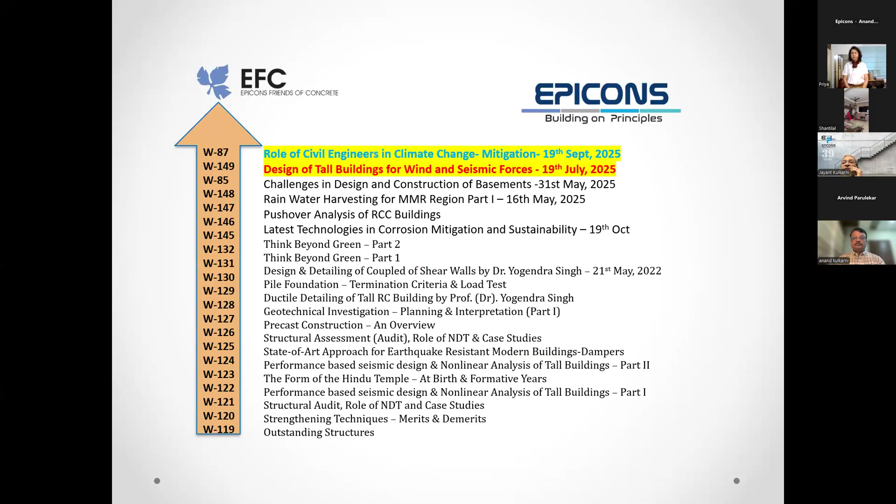With this, I introduce my team. From left side is Arvind Parolekar, architect Parashar Moge, engineer P.P. Pandey, myself, engineer Ravindra Deshpande, engineer Anil Joshi, and engineer Anand Kulkarni. These are all directors of Epicons, unit heads of Epicons, taking Epicons further. And for every workshop, webinar, all of them are involved.

With this, I thank you very much. This is a photograph of our entire team. The photograph is an old one, but most of the team members are still with us today. So I hand over to Priya.

Thank you, sir. That again was an extremely short presentation by the Epicons team and EFC. And of course, there's a lot that is very interesting on the Epicons website. I really request all of you to once again go to their website and see. I find it extremely interesting and fascinating.

So, friends, moving on, I now have the huge responsibility of telling you a little about myself. I run a company called Wide Angle Forum, a small company based in Pune. We do events, and we have a design publication called Design Vista. We conduct study tours for anybody working in design, lifestyle, and construction. We love connecting people together, and that's why our tagline is Connecting Creative Minds, because I believe everybody who is born a human being is a creative person, and I would love to connect with all of you.

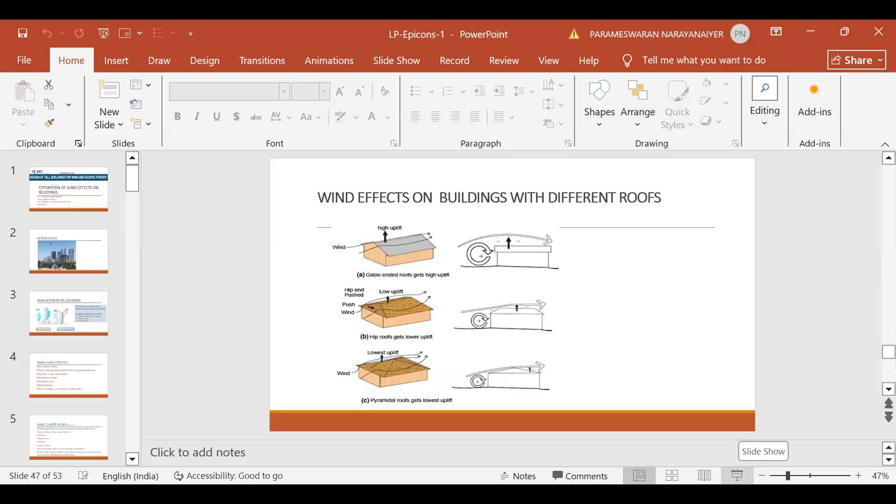Good morning everybody. Thank you, Priya, for the introduction, and thank you, Mr. Jayant Kulkarni, for giving me this opportunity to share my experience with the audience. I welcome you all to webinar 149 on design of tall buildings for seismic and wind forces. The first lecture is on estimation of wind effects on buildings.

As already discussed, tall buildings are mushrooming and they are essentially designed for dead load, live load, and the main lateral forces like wind and seismic forces. These are not isolated structures but very closely spaced structures, so if some collapse happens for one structure, the other structures are also affected, and the presence of nearby structures also affects the behavior of the other structures. So the main lateral forces for which these structures are designed are wind and seismic forces.

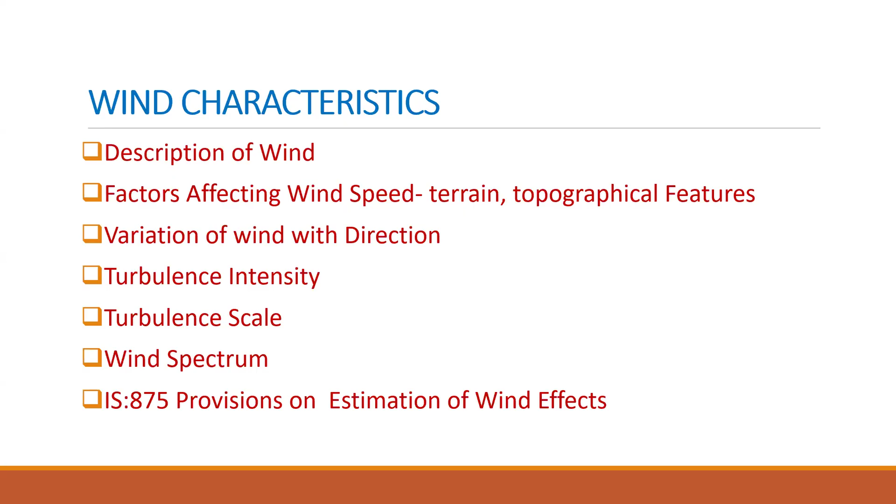When we talk about the wind climate in India, you can see that it is different from other continents. Wind is nothing but flow of air, generated because of atmospheric pressure differentials. But the earth is not stationary, it is also rotating. Because of the rotation of the earth, in the northern hemisphere the wind gets deflected to the right side, and in the southern hemisphere it gets deflected to the left side. So there are many complexities involved in the wind flow, and we feel extreme winds like tropical cyclones and extratropical cyclones.

Then we have the monsoon wind in our country. Thunderstorms are experienced in many parts of our country, large in number, but for short duration. Then tornadoes are there, and pressure system winds in a very small part of the country. So most parts of India experience wind that is a mix of these five mechanisms. We have to understand that the wind experienced in Western Europe or Canada is different from what we have in our country, because they have a more fully developed pressure system, but we have extreme events happening too. So our wind climate is different from other countries. That is one thing we need to understand first.

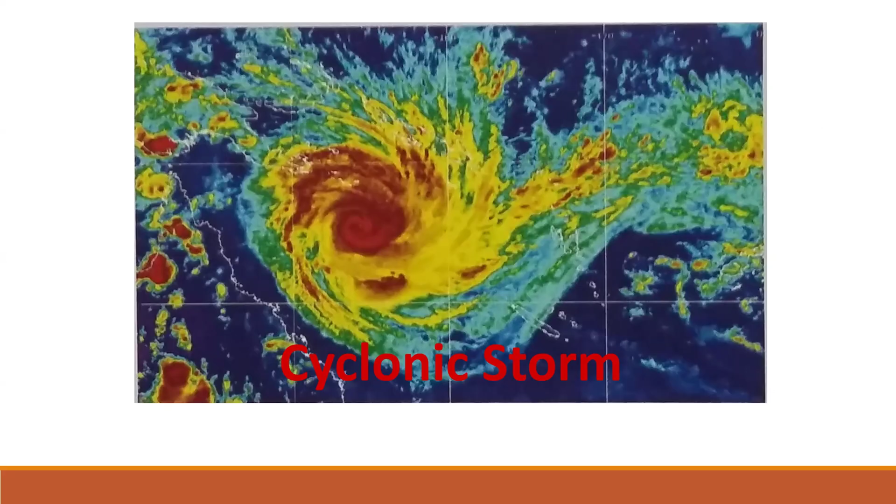Now coming to the cyclonic storm, India has a vast coastal line, and the eastern coast has more cyclonic storms than the western coast. But nowadays, because of climate change, the cyclonic storms experienced by the western coast are also increasing.

Now let us first understand how these tropical storms are formed. Basically, high humidity and ocean temperature over 26 degrees are the two major contributing factors. Water evaporates from the ocean surface and comes into contact with a mass of cold air, forming clouds. You can see the formation of clouds first in the left-hand side photo. Then a column of low pressure develops at the center, which we generally term as the eye of the cyclone, and wind forms around that particular eye. Then as the pressure in the central column weakens, the speed of the wind around it increases. That is how the cyclone is formed.

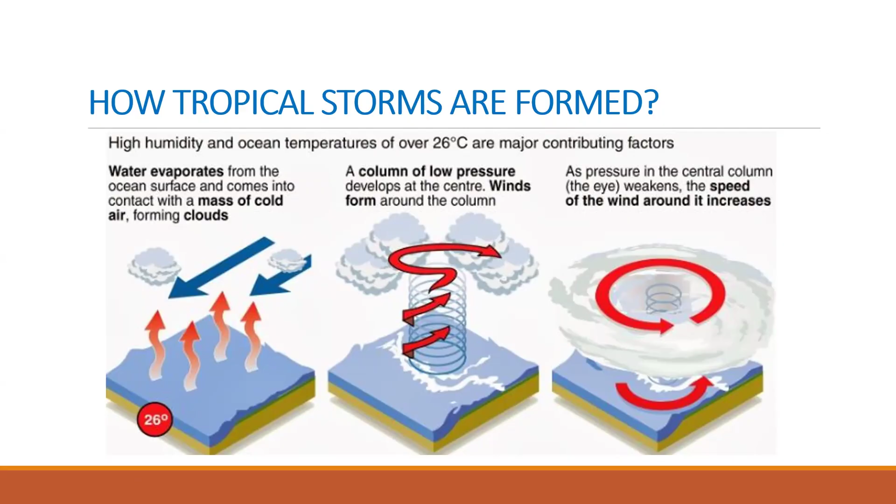So this is the eye, and surrounding that eye you have strong winds with circular contours. Wind moves counterclockwise in the northern hemisphere and clockwise in the southern hemisphere about the center of low pressure. We know that generally, whether it is wind or water, it flows from high pressure to low pressure. So you have a low pressure here, which we call the eye of the cyclone, and then circular contours with high wind there.

Coastal regions are battered frequently by severe cyclones, and we have about 5,770 kilometers of coastline out of a total of 7,516 kilometers that is prone to cyclones.

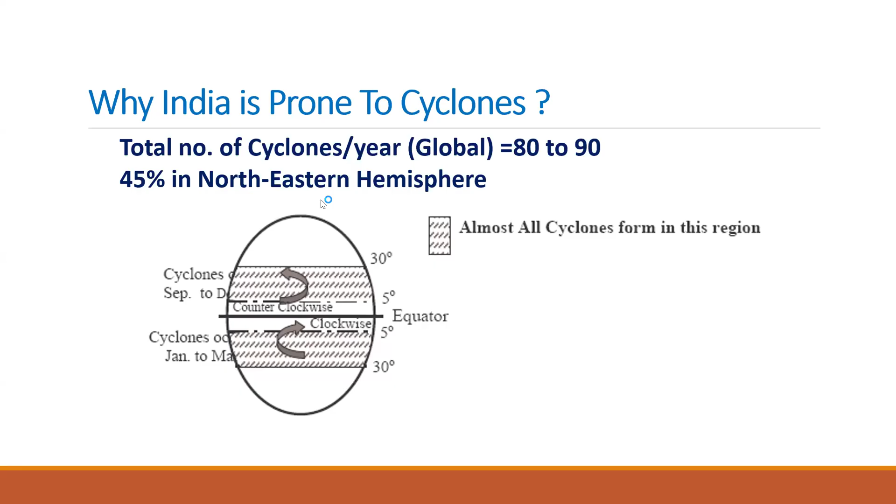Why is India prone to cyclones? Because of its location. You can see that the region between 5 degrees to 30 degrees above the equator, in the northern hemisphere, and 5 degrees to 30 degrees in the southern hemisphere, experiences more cyclones. So totally, there are something like 80 to 90 cyclones every year globally, and 45% of that is in the northeastern hemisphere where India is located. That is why we experience cyclones every year.

Now we have to understand that the cyclone is not an independent phenomenon, but it is accompanied by flood and also storm surge. Another important aspect is that there is formation of heavy cloud and rain happening along with that.

The cyclone also has a circumferential wind speed variation, because when we talk about wind we always talk about the variation of wind speed with respect to height. But in the case of cyclones, there is a circumferential wind speed variation, and that can be felt up to an area with a radius of 300 to 600 kilometers.

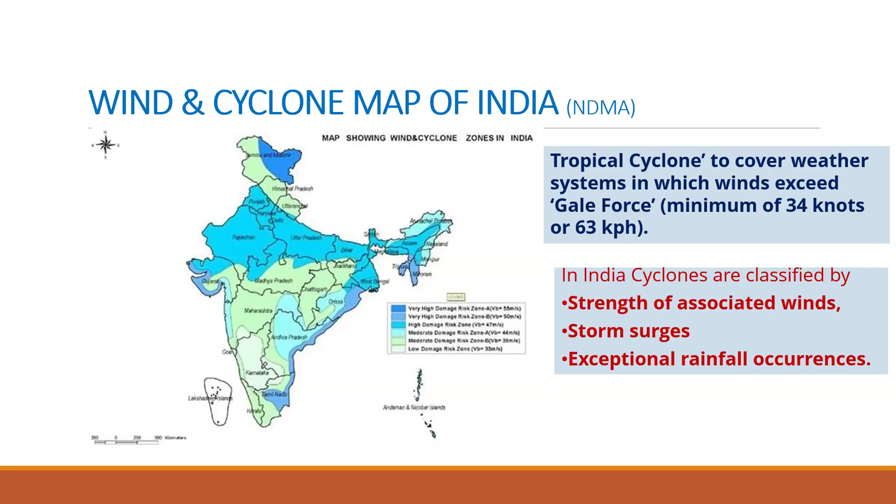You can see that the number of cyclones, like in the eastern coast, are on the higher side. When we call a wind a tropical cyclone, that is when the wind exceeds gale force, or at least 63 kilometer per hour speed, then we call it a cyclone. Cyclones are associated with high wind speed, storm surges, and exceptional rainfall occurrences, which can lead to floods also.

When we talk about the categories of cyclones, we generally hear the term depression - that is, a depression has developed either in the Indian Ocean or Arabian Sea. There, 31 to 49 kilometer per hour is moderate to rough condition of the sea, where the wave height is likely to be between 1.25 to 2.5 meter for moderate and 2.5 to 4 meter for rough sea.

Then deep depression, that is 50 to 61 kilometer per hour, where the wave height may be up to 4 to 6 meter. Then cyclonic storm, that is 62 to 87 kilometer per hour, where the wave height may be 6 to 9 meter, and the condition of the sea will be quite rough. And severe cyclonic storm, where the wave height is increasing to 9 to 14 meter.

Then very severe cyclonic storm and super cyclonic storm - these are basically phenomenal, not always happening, but maybe once in a while. But if the wind speed is exceeding, just think what type of devastation it is going to cause. And the wave height is also 14 meter.

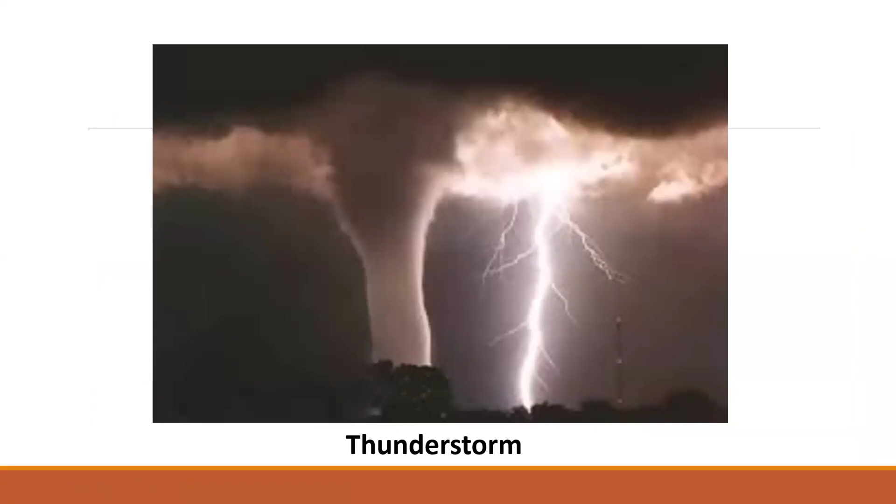Then we have more short thunderstorms experienced in many parts of our country - that is another type of strong wind. And tornado, that is a narrow band phenomena.

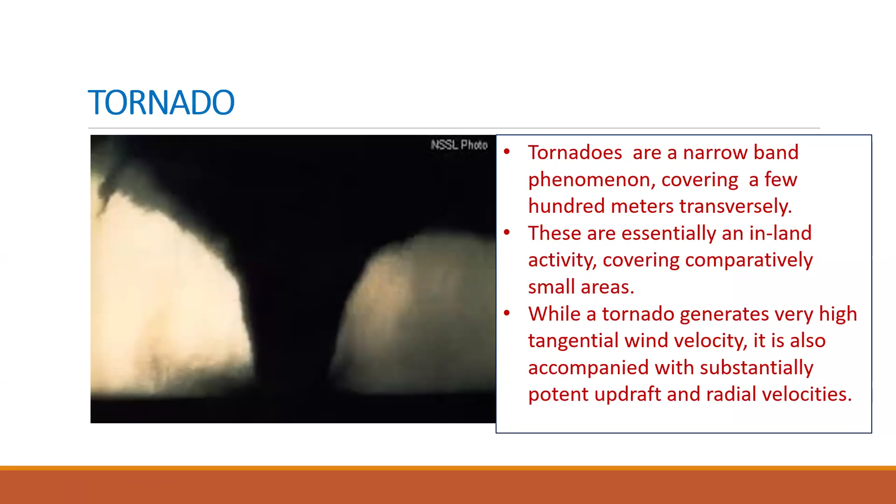In fact yesterday in the US, they had one tornado happening there. They are basically an inland activity covering a comparatively small area, but a tornado generates high tangential wind velocity, and it is also accompanied by substantially potent updraft and radial velocities. That means the variation of wind speed in this event is also different from normal wind.

So windstorm scales and effects are expressed with the help of the Beaufort scale. You can see there are 0 to 12, and 12 is the hurricane here, which has more than 32.7 meter per second or 64 knots wind speed. This wind speed is measured 10 meter above the surface.

Then we have the Saffir-Simpson hurricane scale, because the cyclone known as hurricane in the US is classified into weak to devastating hurricane, and there the wind speed is increasing to more than 250 kilometer per hour. And there is another Fujita tornado scale.

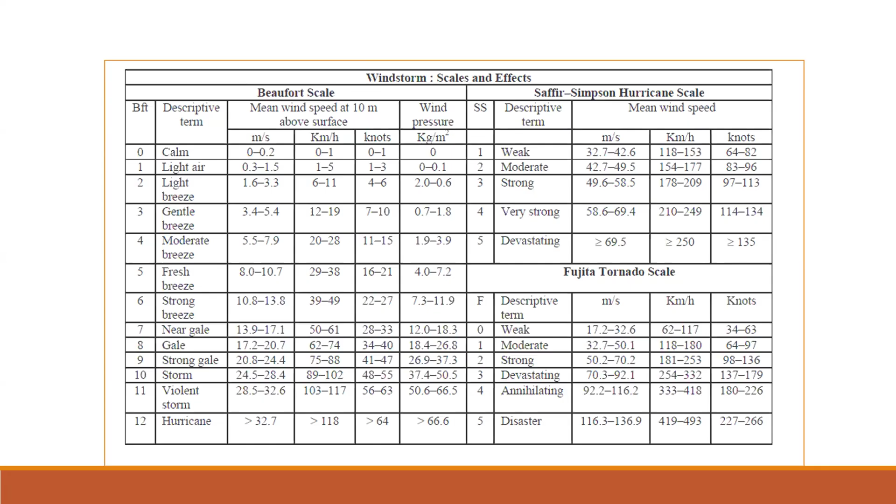Again, they depend upon the wind speed, classified from weak to disaster scale, and the wind speed is increasing to 136.9 meter per second. So this is basically how you can classify cyclonic storm or tornado based on the wind speed, and definitely that will be associated with what type of devastation it causes. For example, the damage expected with respect to buildings, as stated by NDMA, is explained below.

If it is a deep depression or a cyclonic storm, that is likely to cause a major problem to loose and unsecured structures or thatched huts which are there in our coastal areas - they are the first to get damaged. Then with severe cyclonic storm, again damage to the thatched huts. And it's not only that they affect huts or buildings, but along with that there may be uprooting of trees, damage to power and communication lines, or it may affect electric poles and other structures.

Then very severe cyclonic storm causes extensive damage to thatched roofs and huts, and can also damage some old buildings, with large scale disruption of power and communication lines. And super cyclone, like the one which we experienced in Orissa.

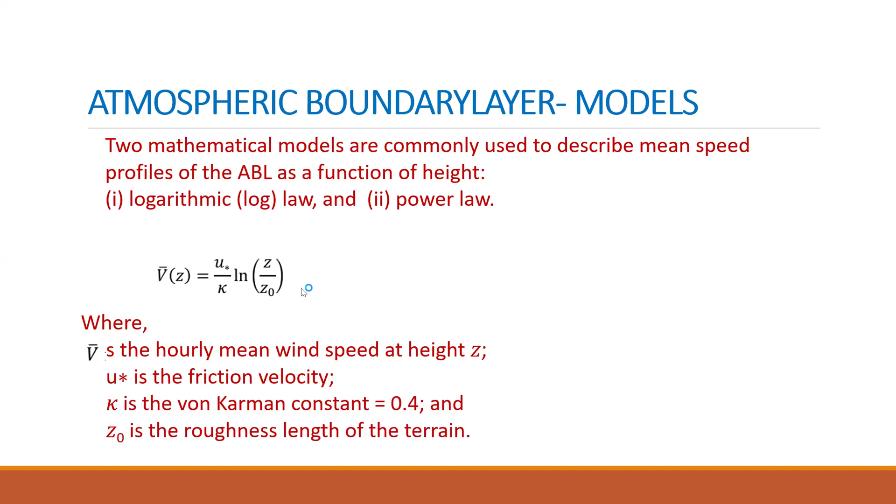If V bar Z is the hourly wind speed at height Z, then it is a function of friction velocity, the von Karman constant, which we generally take as 0.4, and the logarithm of Z, since it varies with height. So at any height Z, and Z0 is the surface roughness length of the terrain. Surface roughness length means the surface which is offering some resistance to the flow of wind. This is the logarithmic law used to describe the mean speed along the atmospheric boundary layer.

Another is the power law that may be used to describe the ABL. This is important because if you see any wind tunnel test report, the wind simulated in the wind tunnel is based on the power law. The reference wind speed is a function of the speed at the reference height, generally taken as 10 meters. So at any height Z, say 20 or 30 meters, we divide, for example 30 by 10, and there is an exponent, the power law exponent, corresponding to the surface or terrain roughness.

Now, we need to understand that when we talk about the hourly mean wind speed, there is no gust wind included. The log profile or the power law profile are basically the mean wind speed profile and not the gust speed profile. But if we want to get the gust speed profile, we need to include two terms: one is the peak factor for upwind velocity fluctuation, and the other is the turbulence intensity.

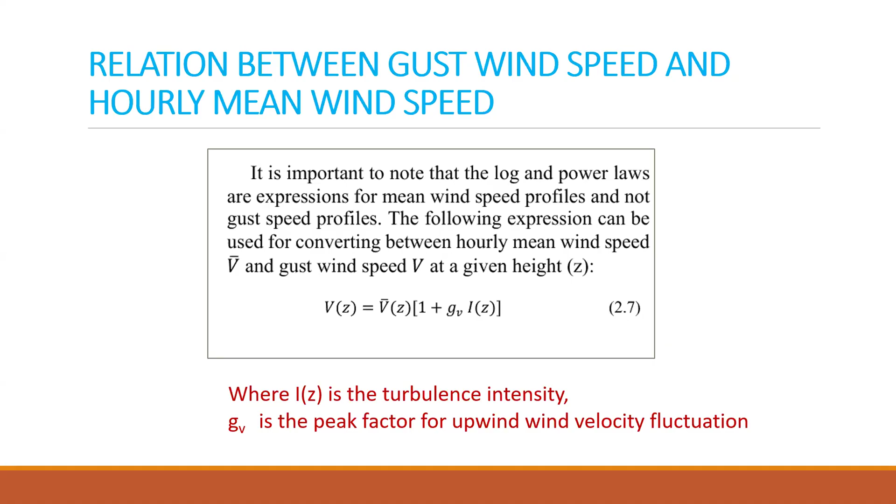So about these two, we will be looking more in detail in the coming slides. First we need to understand how the terrain and topography affect the wind speed. We know that the terrain on which the wind is flowing is also not constant.

The structure may be located very close to the sea, on the coastal region, where very little resistance is offered by the water. At a particular height, you can see something like 0.8 Vg, where Vg is the gradient velocity. After it reaches this level, there is no variation in the wind speed, so we call it the gradient wind velocity. It may be something like 0.8.

But you can see that there are many trees on the windward coast. This means the trees are offering resistance to the flow of wind. At the same height, this 0.8 Vg has become 0.6 Vg, meaning these trees are offering some resistance. That is what I mean by terrain roughness created by the presence of these trees.

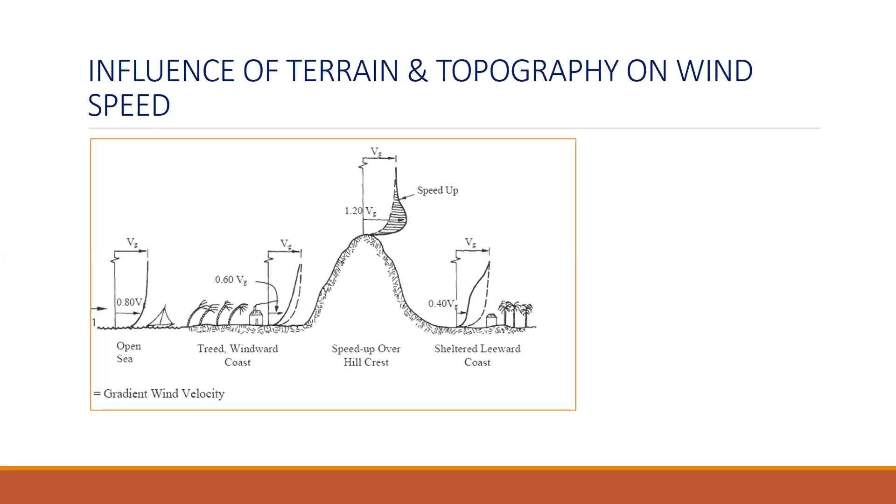But on the downside of the hill, the profile is somewhat different. This difference happens because the hill is basically sheltering the structures on the downhill side. So not 0.8 Vg, but what is experienced by a structure here is only 0.4 Vg. This explains how terrain and topography—the presence of hill, valley or ridge—affect the wind speed.

So while siting the buildings, what we have to remember is that the trees basically shield the structure from high wind, and the hillock also protects the buildings on the downhill side. But if you are constructing on top of a hill or ridge, that will be subjected to higher wind velocities. The downhill structures are going to get protected from high wind velocity because there is a sheltering effect here.

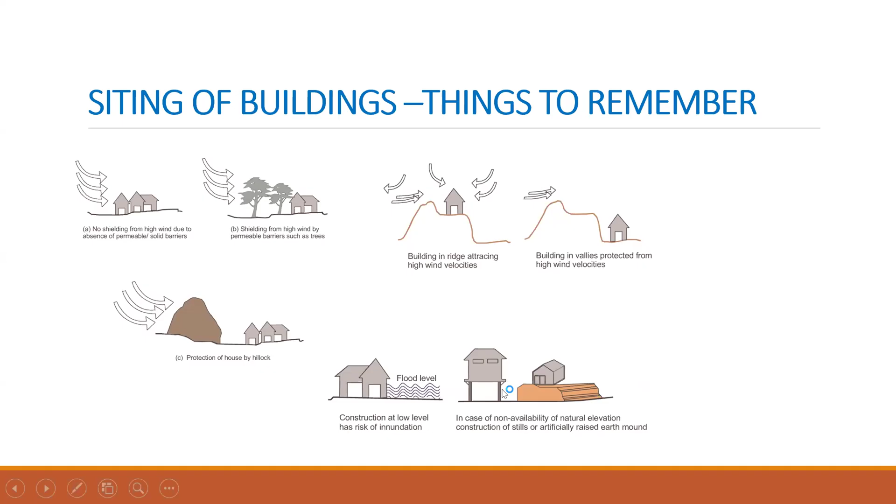As we discussed, cyclonic events are accompanied by rainfall and flood. So it is better that we don't construct at low level, but better to construct on an artificially raised earth mound, or maybe a little above the ground. If we construct like that, it will protect it from the flood also.

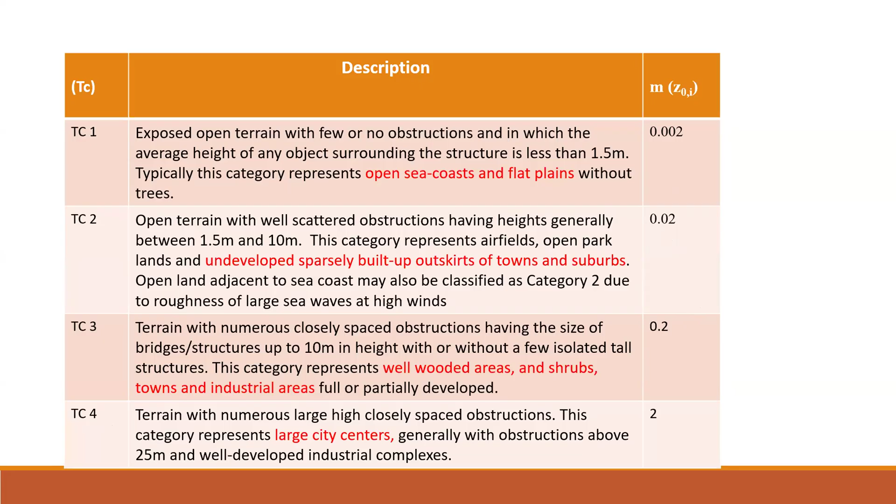So this is the category how IS 875 has classified: open sea, open level country, suburb, forest and city centers. These are the boundary layer heights, because this boundary layer height also increases with respect to the increase in the terrain roughness.

As I said, in the wind tunnel we will be simulating the wind using the power law. These are the typical power law coefficients, like 0.14 to 0.4, as the terrain category increases. The height is also important, because depending on the height of the structure, that tall structure, or whatever structure is there, has to be within this particular boundary layer also.

So basically within the atmospheric boundary layer, the gustiness of the wind arises because of the frictional interaction with surface features such as vegetation, building or water surface, which we call terrain. I hope it is clear that we are talking about the boundary layer and how the wind speed is varying with different terrain roughness, and how that can be mathematically expressed using the log law and the power law.

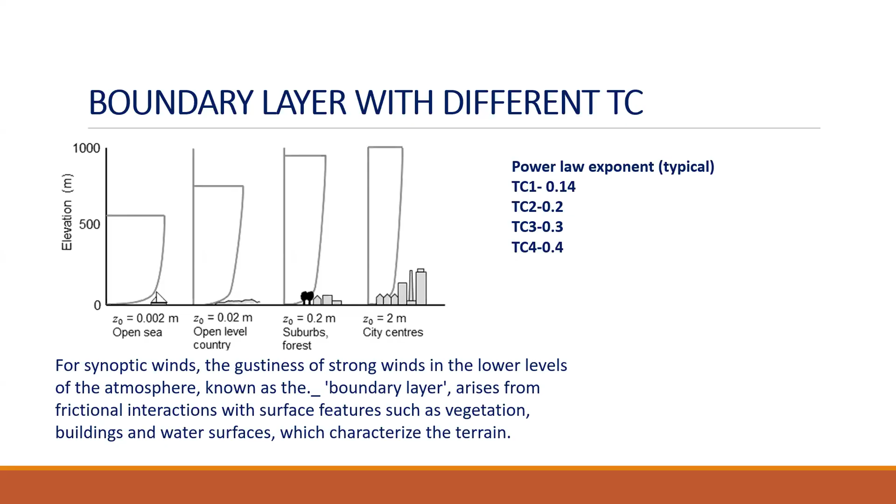And what we have is a wind which is average peak gust velocity averaged over a short time interval of 3 seconds, and it corresponds to open terrain, that is terrain category 2, and also it has a return period, that is 1 in 50 return, the probability of return of having a wind that is 1 in 50.

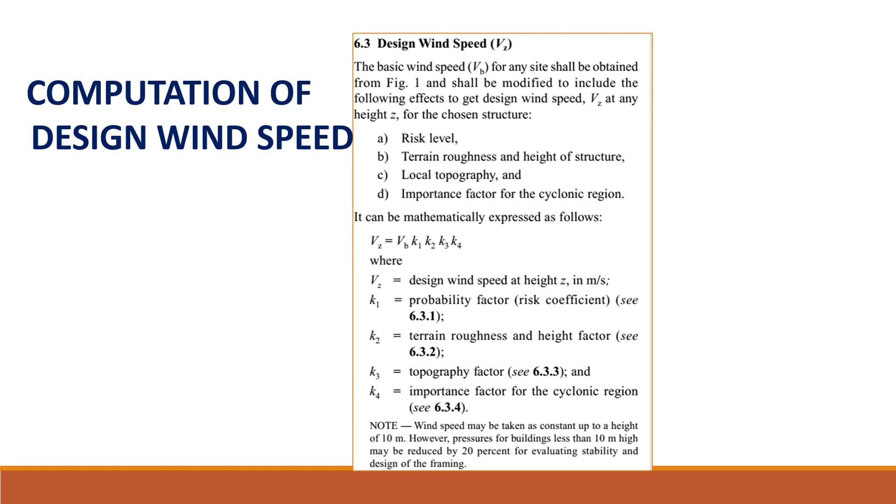Basically, if your structure is less than 10 meter, then you take that as a 10 meter high, and it can be reduced by 20% for evaluating the stability and design of framing. So the design wind speed is obtained from the basic wind speed by multiplying with K1, K2, K3, and K4.

Now coming to the K1 coefficient, it depends on the mean probable design life of structure. All general buildings have 50 years, and K1 factor remains constant at 1 across the wind speed zones. Temporary sheds, etc. have a mean probable design life of 5, so the factors vary from 0.82 to 0.67. Buildings and structures presenting low degree of hazard have 25 years, and again the factors vary. Important buildings and structures have higher design life, like 100 years, so you have a factor more than 1, varying from 1.05 to 1.08, depending upon where the structure is located. These factors are given in this particular table.

If you want to work out the K1 factor for any other return period, a formula is also given here. That formula helps to find out the K1 factor if it is for 10 year or 20 year.

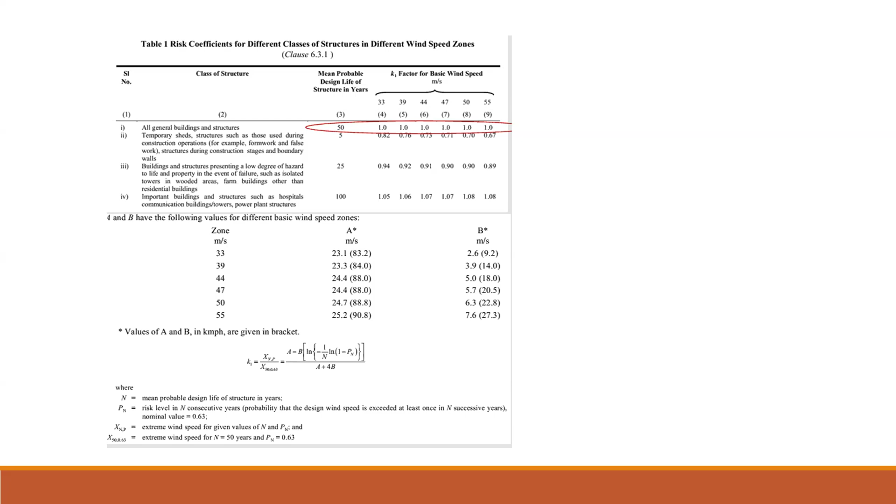For TC2, you have a value of 1, because the basic wind speed map has been prepared corresponding to terrain category 2. So for other terrain categories, there is a multiplying factor, and the factor is more than 1 for TC1 and lower than 1 for TC3 and TC4, at height up to 10 meter. The values are given up to 500 meter, so if you want to design a structure up to 500 meter, this can be used.

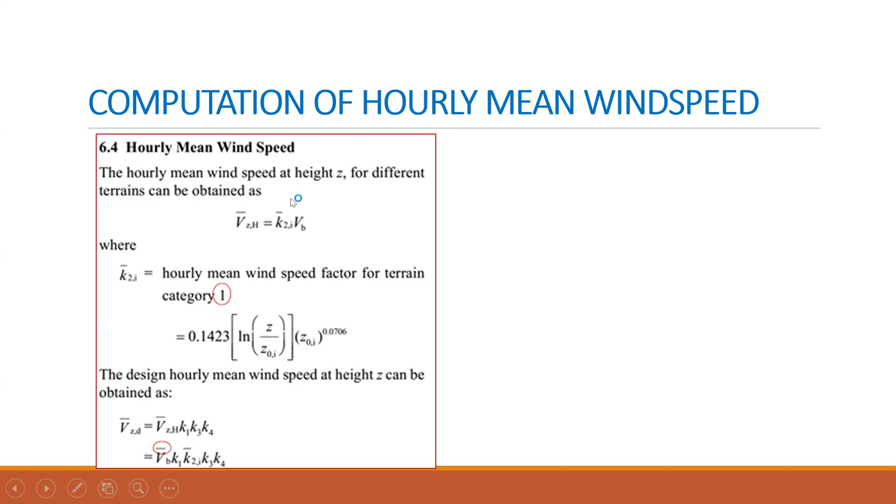Now, as I said, there are two averaging wind speeds given. One is corresponding to 3-second gust, that is the basic wind map, which is based on that. And another is the hourly mean wind speed, where the averaging time of wind is 1 hour. So there, instead of K2, you have a different multiplier called K2 bar. How this K2 bar is coming, there is an equation given here.

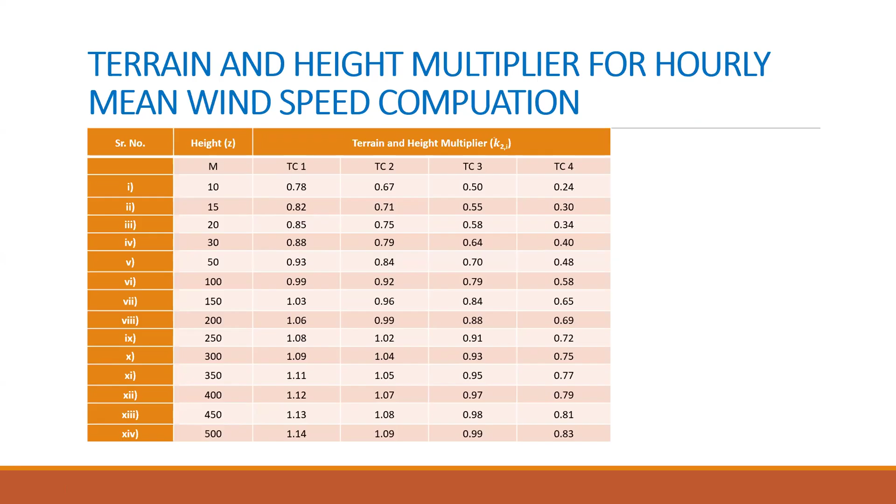You can work that out, or this is the table which gives the hourly K2 bar multiplier, or the terrain and height multiplier, for the hourly mean wind speed computation. Here you can see that for TC1 at 10 meter, the factor is 0.78, whereas for TC4 the factor is 0.24. So again, the K2 bar factor is given from up to 10 meter to 500 meter in this particular table.

Now, another factor, the topography factor. As we discussed, the basic wind speed is given for general level of site above sea level, but suppose there is a hill or some topographic feature, then there will be some acceleration of wind speed near the summit of hills or crest of cliffs, etc. So how to work out that K3? That is also included.

In fact, up to a 3-degree upwind slope, the multiplication factor is 1 only, but when it increases, then the factor varies from 1 to 1.36. How it can be worked out is given in appendix C of IS 875 part 3. First we need to understand how much length is affected by the topographical features.

To obtain the effective length of a topographic feature, for upwind slope between 3 to 17 degrees, the effective length is taken as L, and for more than 17-degree upwind slope, it is taken as Z by 0.3. The topography factor can be computed as 1 plus C S0. C is taken for different slopes as given in this slide.

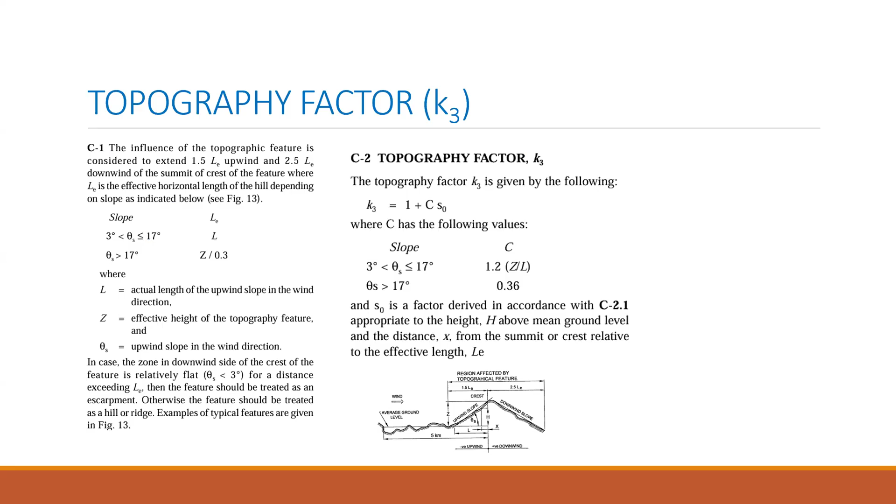Depending on where your structure is located and the length influenced by that particular topographical feature, one can work out the K3 factor. Appendix C of IS 875 gives that.

Now there is an importance factor for cyclonic region, that is K4. We have seen the structure of the cyclonic storm, and found that up to about 50 kilometers the effect is much more, and there is also a circumferential variation of wind speed. As I said earlier, our east coast of India is more vulnerable to severe cyclones, but the western coast, like the Gujarat coast, has also had severe cyclones.

And because of the cyclone...

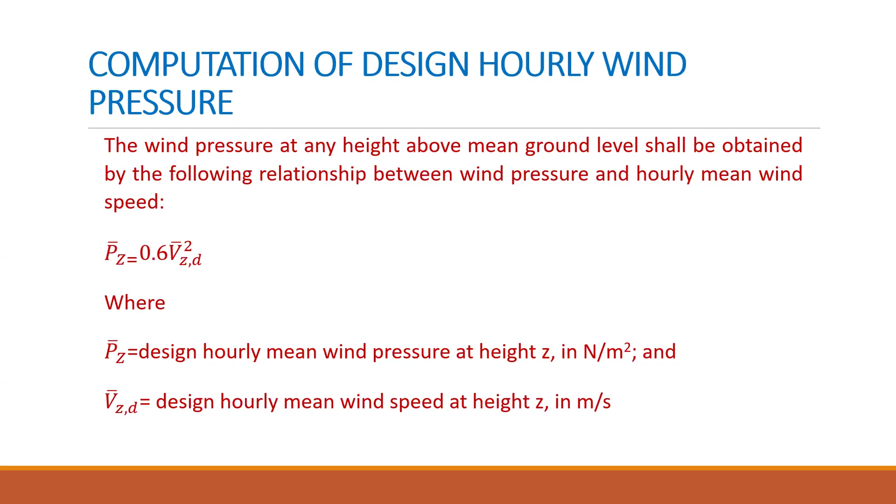Now I will discuss turbulence intensity. As I said, there are 4 terrain categories, and for these categories, the turbulence will be more near the ground and reduces with height. It is also a function of the surface roughness height.

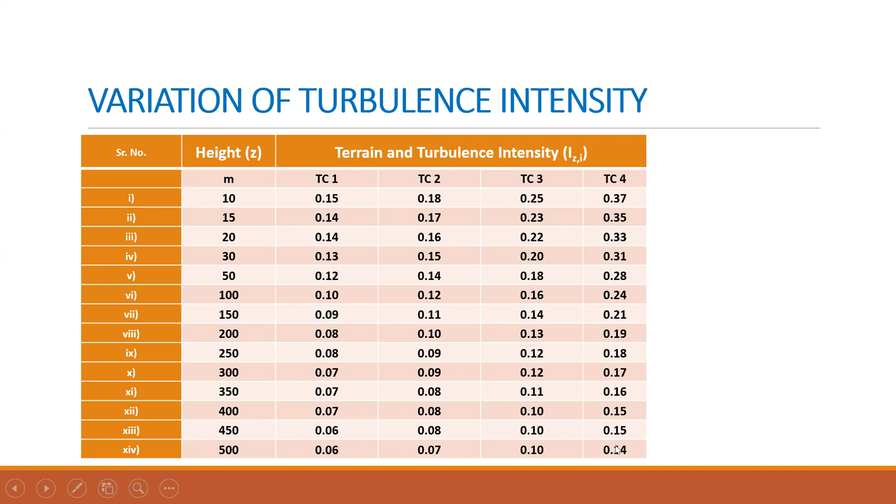You have these 4 equations, and for convenience of the participants, I have prepared a table. You can take the terrain and turbulence intensity from this table. For terrain category 1, it varies from 0.15 at 10 meters to 0.06 at 500 meters. Terrain category 2 has more turbulence intensity at 10 meter height, and the maximum is for TC4, which is 0.37, but along the height it falls down to 0.14. This is the variation of turbulence intensity.

Now, after discussing wind speed, design wind speed, and design wind pressure, we will see how it affects the building. Considering low-rise buildings, we have seen that a large number of them are getting affected by cyclonic winds.

The vulnerable components prone to wind action are the wall and roof, and the walls have certain openings like doors and windows. So the opening on the wall, the secondary members of the roof which support the roof material, the connection between wall and roof, and the connection between the roofing material and supporting members - these are all affected by wind forces.

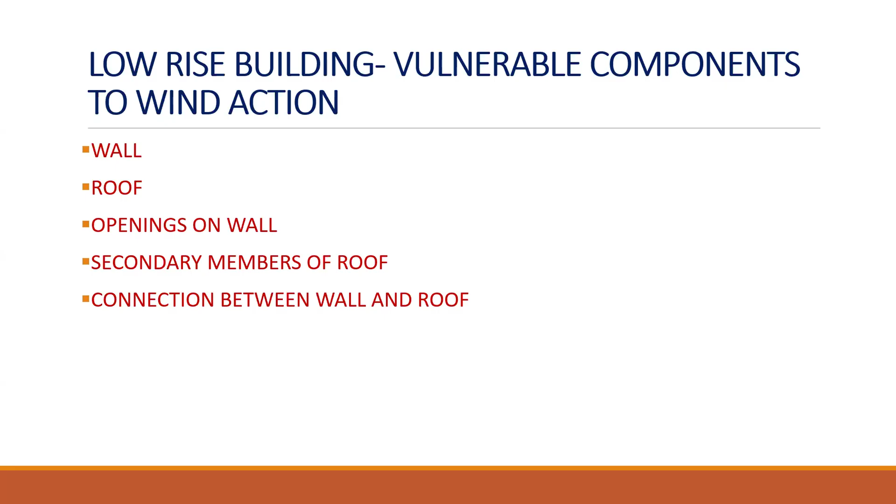There is a suction, that is the force which is moving away from the side wall, or again a suction on the rear wall, the force moving away from the rear wall. Positive pressure means it is acting on the wall, and suction means it is moving away from the wall. So these are the forces acting as wind interacts with a structure.

The pressure and forces on the surfaces of the wall and roof are generated, and the characteristic of this pressure is influenced by the approaching wind characteristics as well as the geometry of the structure. So with respect to wind action, the geometry in plan and elevation is going to be very important.

Significant internal pressure develops because buildings invariably have openings like doors, windows, etc. Where the openings are and what the permeability is, that also plays an important role. The geometry, shape in plan and elevation, and where openings are located will cause the internal pressure distribution.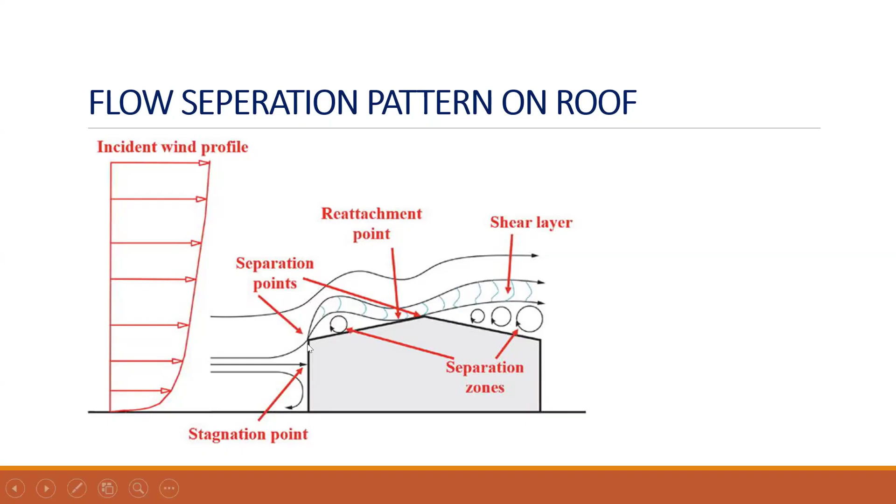Once it is reattached, again it may get separated like this, and some shear layer is formed. So the point of attachment and separation depends on the size of the building. The flow gets attached and separated, and a shear layer is formed.

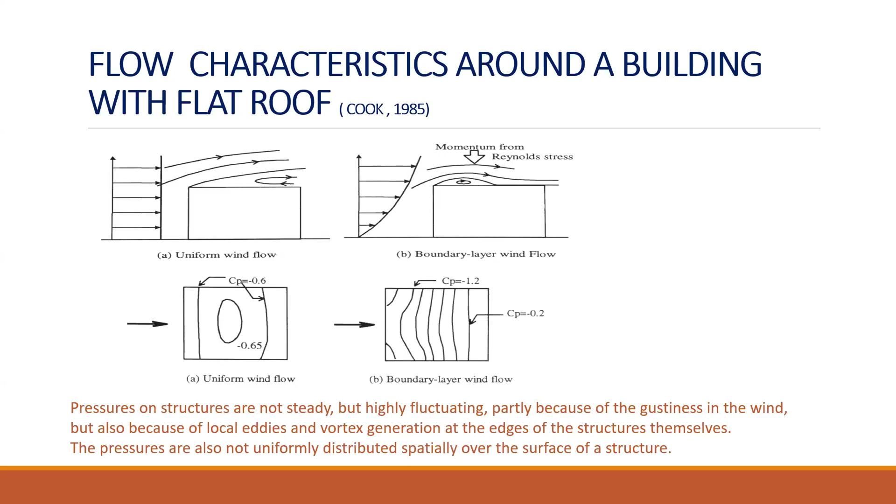They are not uniform. The wind itself is a time-varying phenomenon; it has fluctuation, and it is varying spatially along the height. And when it is impinging on a particular structure, the pressure distribution around that body is also not uniform.

So the wind pressure and force on the building, IS 875 has given how it can be calculated for the building as a whole, or for individual elements like roof, wall, etc.

Another is the cladding units like glazing or the connections, which we discussed, that is the fixings. So after we compute the design wind pressure, there are certain multiplication factors given: one is the wind directionality factor, another is the area averaging factor, and another is a combination factor. But there is also one rider, that the value of PD, the design wind pressure, shall not be less than 0.7 PZ. So that is what they give.

Now we try to understand what is the wind directionality factor, because the wind direction can be random. Considering the randomness in the directionality of the wind, and if you see the IS 875 pressure coefficients given at different wind angles, the wind need not be coming from the peak direction always, depending upon the location of the structure. So there is a multiplication factor of 0.9 given for certain types of structures.

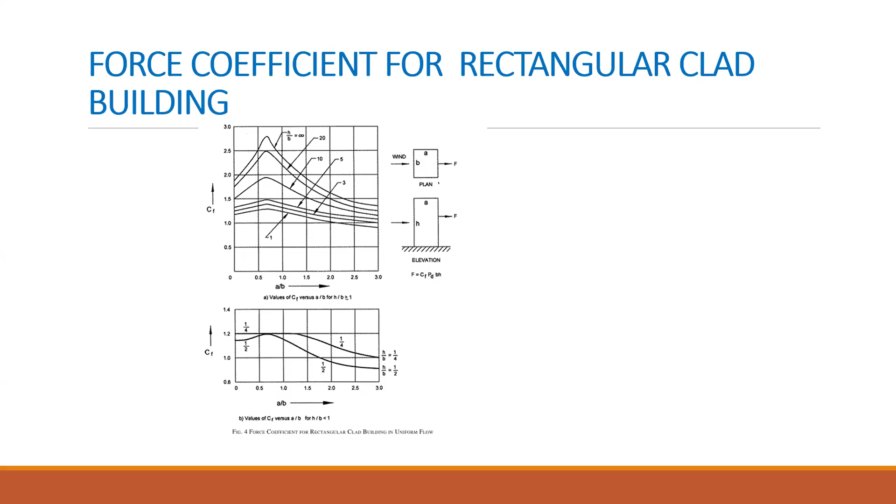Apart from the rectangular shape, there are also tables corresponding to various other shapes, where again the H by B factor and A by B ratio are important. So what I want to tell you is that you can use IS 875 to work out the pressure acting on various elements like roof and wall, and where there is an opening, there is an internal pressure coefficient, and otherwise on these components, the external pressure coefficient.

Then when you are considering the building as a whole, you have the force coefficients which are also included in IS 875. Once you compute the design wind pressure, you can work out the force acting on the building as a whole, if you know the force coefficient for that particular building.

But you have to remember that the values given in IS 875 are based on wind tunnel studies, some on uniform flow and some on boundary layer flow. If the shape of the building is different from what is given in IS 875, you may have to go for specialist literature or wind tunnel studies to obtain those force coefficients or pressure coefficients.

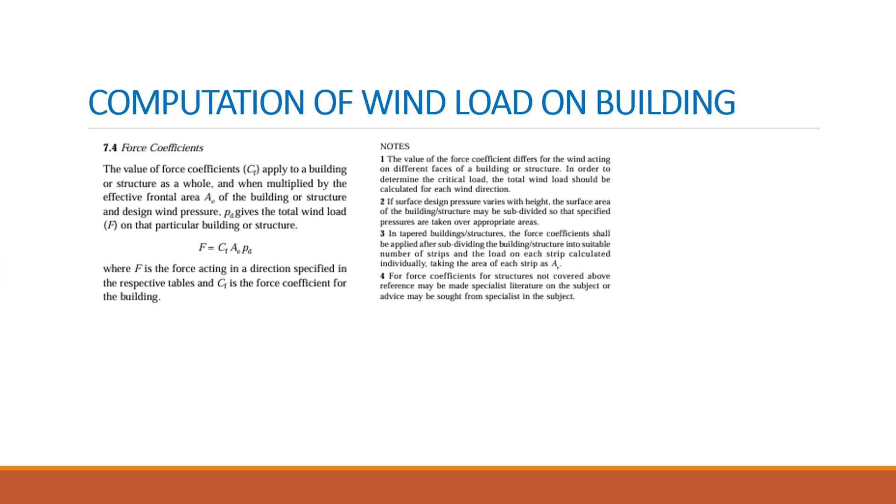So we will be looking at these aspects more in the next lecture. If you have any question, we can have a discussion here.

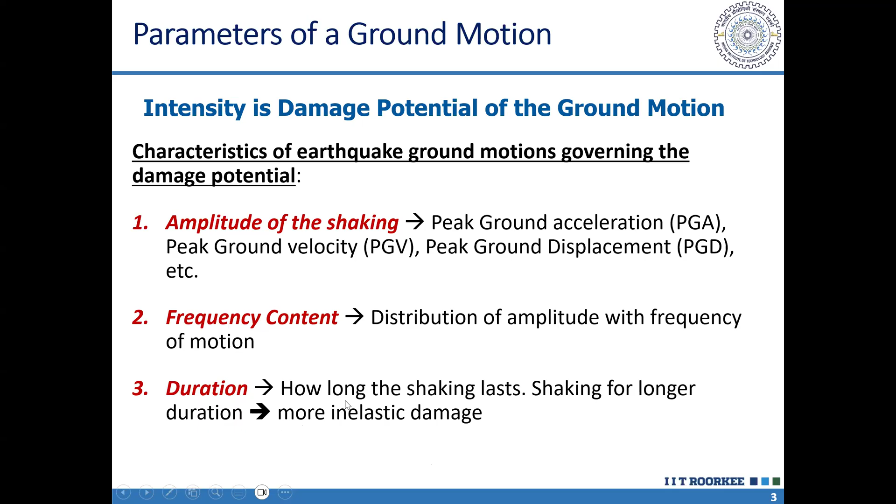Now let's look at how these parameters are governed by natural phenomena. There are three effects we need to consider, and these have been underlined in our revised IS 1893 Part 1.

The first is the source effect. This depends upon the source mechanism, how the energy is released, what type of slip is occurring at the source, whether strike slip or dip slip, and how deep it is. Sometimes the magnitude of an earthquake is large, but because it was deeply buried in the earth's crust, the damage was less. So depth decides the characteristics, and also the distance from source matters. Near-fault effects occur if the site is very close to the source. So all these source characteristics need to be understood.

Then there are path characteristics. As the energy travels from the focus or hypocenter of the earthquake to the site, passing through the geomedium, its characteristics change, and these are region specific. Like Lakshmi Madam was talking about wind characteristics differing across continents, similarly path characteristics differ across continents, depending upon the crust properties through which these earthquake waves travel.

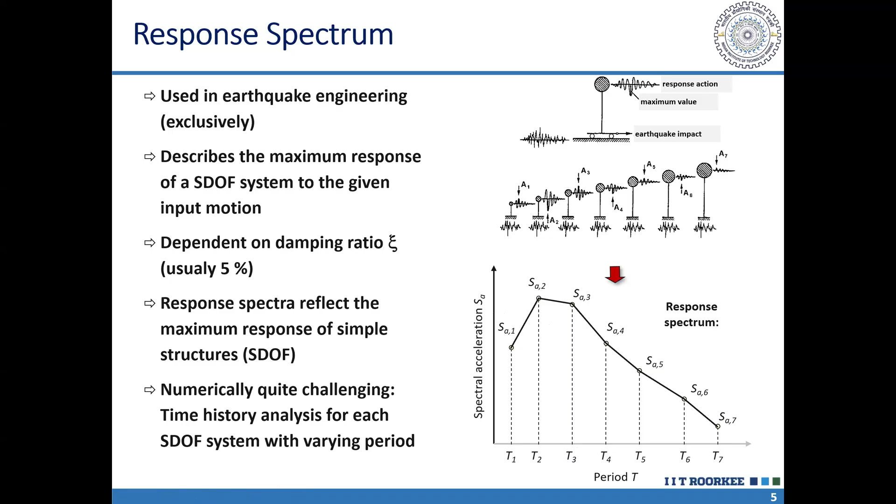In case of low-rise buildings, we can even ignore the contribution of higher modes, but in case of a tall building, we can't ignore it. It will be less than the fundamental mode, but it is not negligible. We have to consider the contribution of higher modes also.

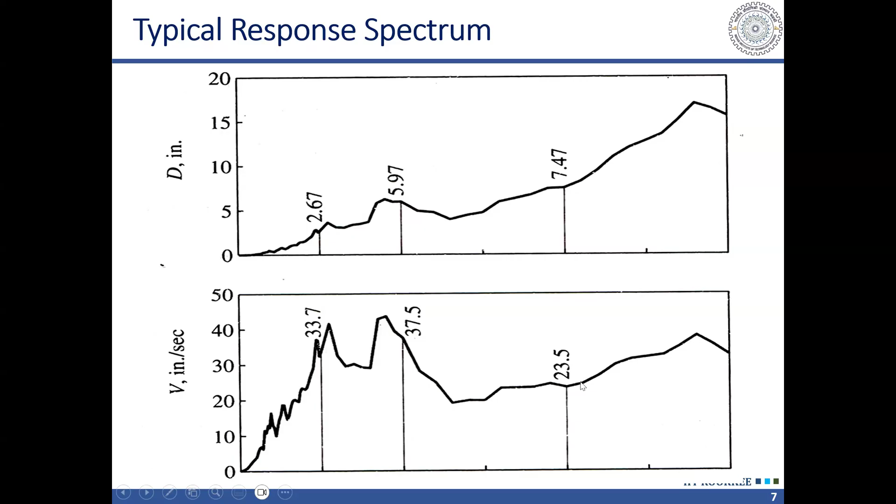For a real earthquake, we can plot this response spectrum either in terms of displacement, meaning I take the peak displacement of each single degree of freedom system and plot that. I can plot the velocity, taking the peak velocity of each system, and acceleration. Most important to us, or conventionally the most used, is this acceleration response spectrum.

This acceleration response spectrum is important because we can get the force on the structure directly from here. We can read, corresponding to the period of the structure, the spectral acceleration, and when we multiply that by the mass or weight of the structure, we get the seismic force acting on it.

Conventionally, the horizontal components of earthquake have been considered in analysis because any structure is inherently weaker in the lateral direction. In the vertical or axial direction, the structure is strong. So conventionally, the horizontal direction, or two components in the horizontal direction, have been considered.

But it has been observed that the vertical component is not insignificant. In some cases near the field, it may be as strong as the horizontal component itself. So in at least some structures, the vertical component will be significant. Now we are having not only the horizontal response spectrum but also the response spectrum in the vertical direction, and that shape is also given in IS 1893. We will talk about that.

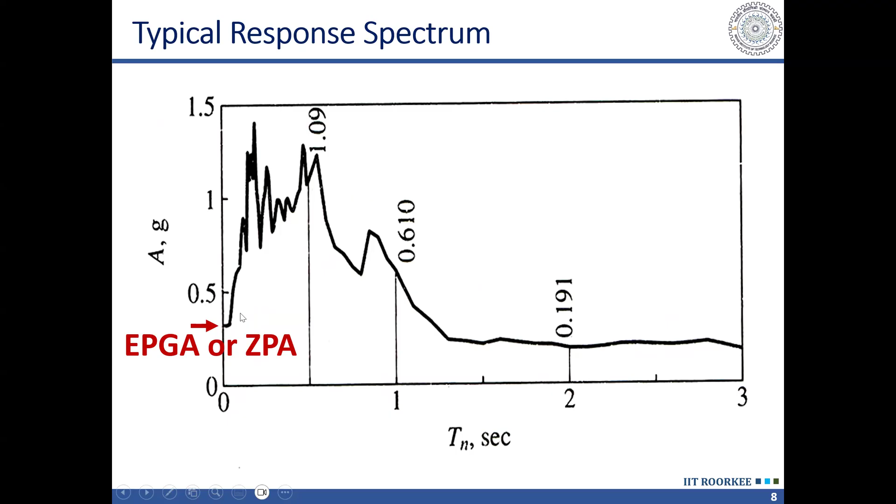Then the local site effects came into discussion after the Mexico City earthquake in 1985. After that earthquake, local site effects were discussed a lot because a very unusual phenomenon was observed in Mexico City. The earthquake occurred more than 300 kilometers away from the city, but still it caused extensive damage.

The reason was that it is taking much longer in reversing its direction, or we can say that the frequency content or predominant frequency of this earthquake was much lower. Unfortunately, that matched with the frequency of structures in the range of 5 to 20 stories, so those structures were severely damaged during this earthquake.

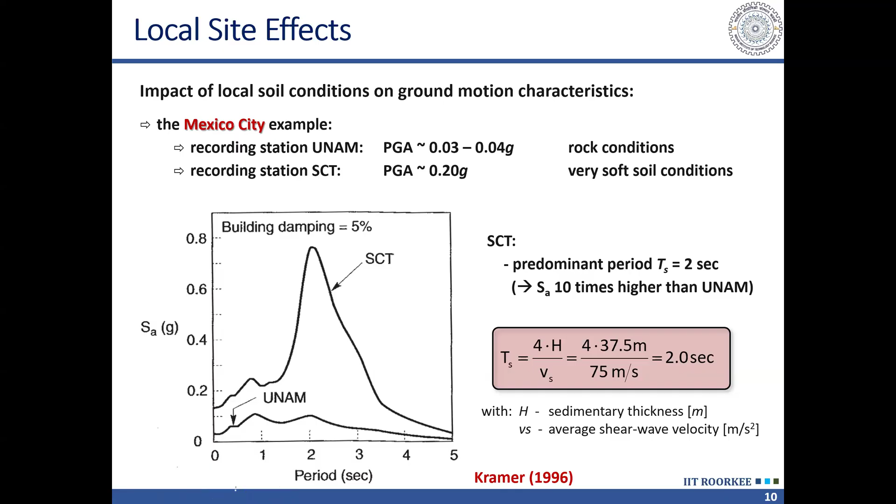So the frequency content is also very important, and the local site effect, or the type of soil strata at the local site, is affecting the ground motion significantly, and this needs to be taken into account.

And if you remember from the code, the equation for this is 1.67 divided by T, whereas for type 1 rock or hard soil, it is 1 over T. So roughly a 67% increase in the spectral acceleration and the forces if our structure is located on soft soil at the same location, with the same distance from the source, just because of the difference in local site soil type, there is a 67% increase.

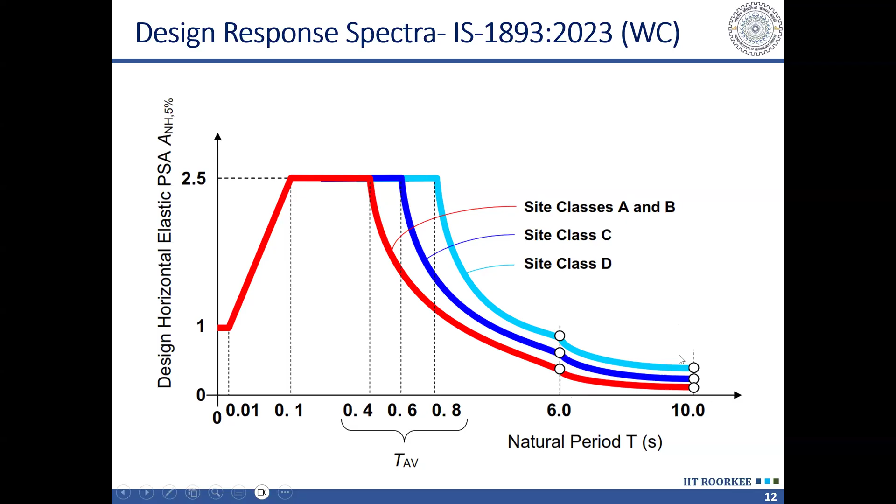So now our response spectrum is very similar to what we have in EC 8 or Eurocode. Earlier, the acceleration was considered to be constant. That was wrong, though it was not affecting the forces much, because in any case acceleration reduces significantly here, and generally the design is governed by the minimum force required by the code. So it was not affecting the force design, but it affects displacement a lot, because displacement is increasing here. Even though spectral acceleration is much lower, proportional to 1 upon t square, the displacement will be peak, because it is multiplied by t square by 4 pi square to convert into spectral displacement, and the period t value is quite large. So that's why the displacement here is quite large.

Another issue to keep in mind is that in an earthquake, we can record three components at any point, and the orientation of these three components can be in any direction randomly. Any motion in 3D space can be defined by three vectors, three components. So if we measure those three components in any direction, we can uniquely define that motion. But when plotting the response spectrum, we are considering one component at a time - either horizontal in x direction, horizontal in y direction, or vertical. So the direction in which we are plotting the response spectrum becomes very important.

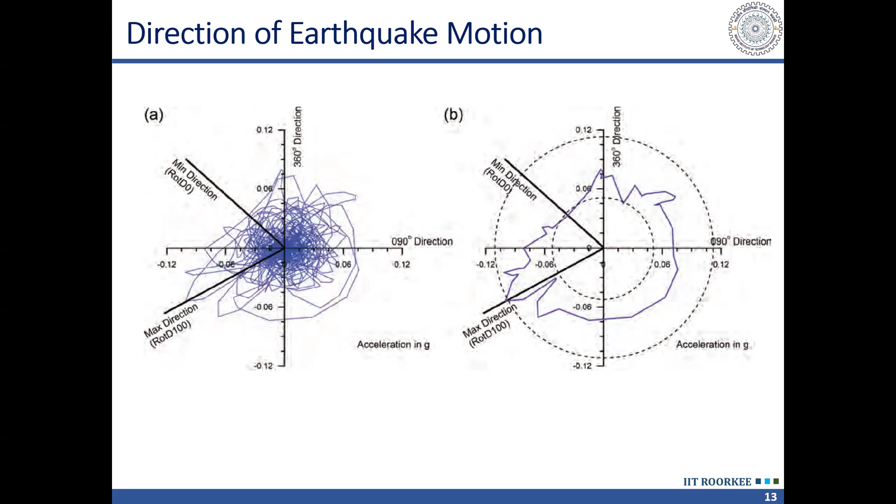This also becomes important. It's still not clear what our code is representing, and the revised code also doesn't mention this, but we have to keep it in mind, because in some earthquakes, or at sites close to the earthquake, we can have this Doppler effect.

What is this Doppler effect? The earthquake source, when the rupture takes place, occurs over finite time. It takes some time, gradually the rupture moves, and at each instant it is generating a pulse. These pulses can have constructive or destructive interference. When constructive interference occurs, we get a velocity pulse.

So near-fault cases need to be considered with more care, and the revised code talks about this effect separately. Near field effects, like in case of wind, have an analogy with locations experiencing cyclones, so there is an additional factor for cyclone-prone areas. Similarly, areas close to the sources, like the Himalayan region, or anywhere our site is close to the source, this phenomenon is possible.

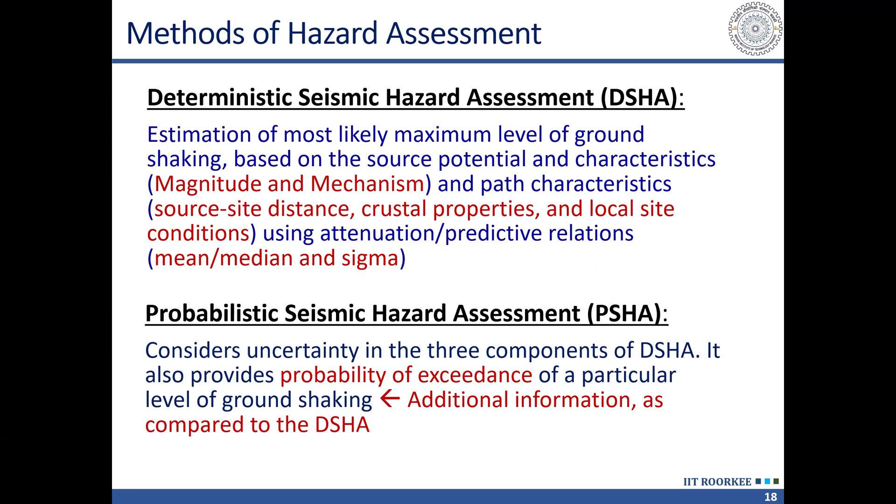The steps in deterministic seismic hazard assessment: we consider all the faults in the vicinity of our site, and vicinity here means 300 kilometers. So at least those sources within 300 kilometers of the site must be considered. Those sources may be defined either as a line, an area, or a dipping surface - these source characteristics need to be known.

When we talk about source characteristics, first is the magnitude - what magnitude earthquake this source can generate. Then we consider the distance of the site from the source, and depending on the distance, we consider attenuation of the energy released. Because we know if energy is released at any point, as we go away from that point, the energy is distributed over a larger volume.

When the energy travels in the form of elastic waves through the soil or rock medium, it is subjected to some damping, so some energy dissipation takes place. Depending on this distance, for estimation purposes, we generally take the closest distance or any other appropriate distance.

Based on that, we can calculate the intensity or PGA or response spectrum due to each source at this site. We take whichever source gives us the maximum value of PGA or response spectrum or spectral acceleration at a particular period. That source we call the governing source or governing earthquake, and we draw the response spectrum for that earthquake, which we use in our design. These are the steps in deterministic seismic hazard assessment.

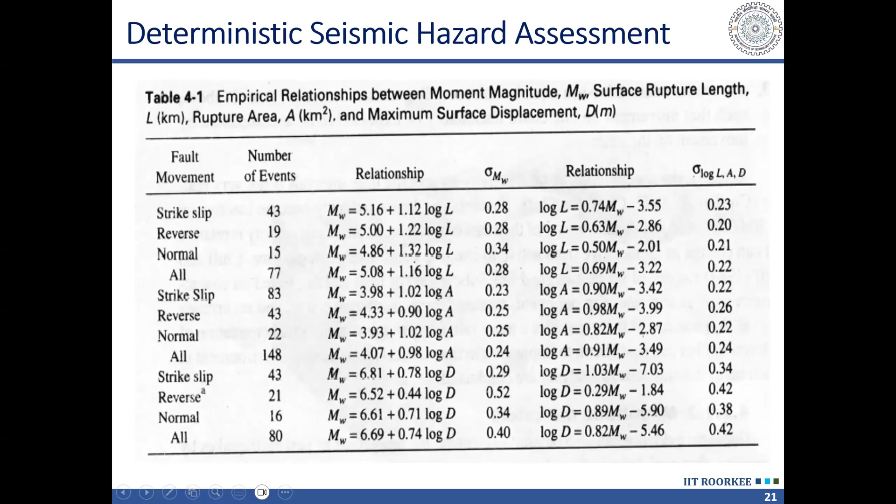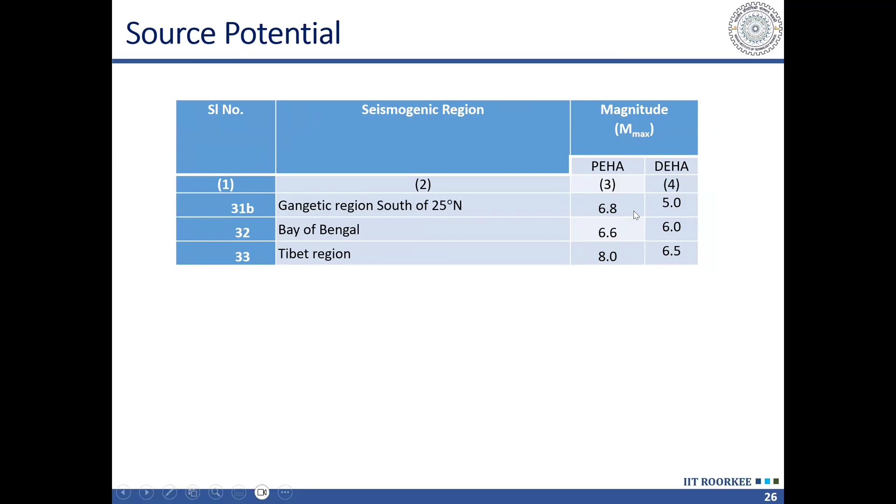Now interestingly, in our revised code under revision for the Indian continent, Indian subcontinent, 33 different sources have been identified. So different zones are considered as one source, and for each source, the magnitude is also defined for probabilistic as well as deterministic assessment, what magnitude we have to consider in each case.

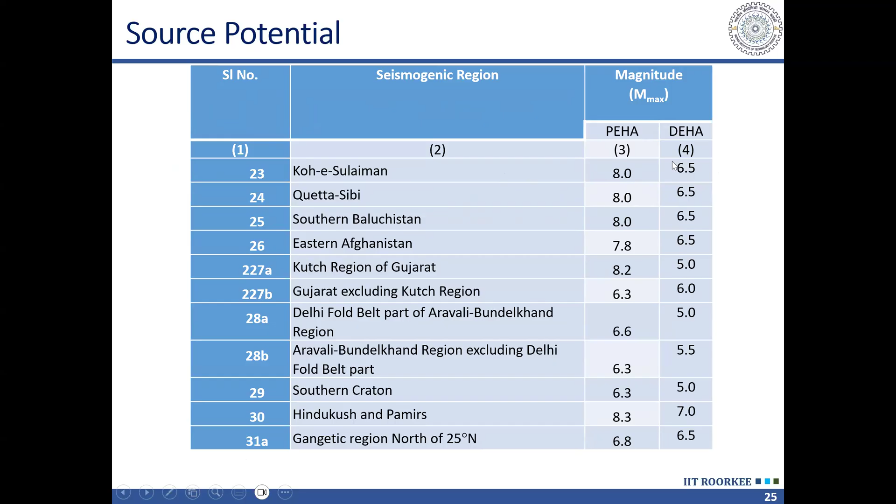Probabilistic assessment comes with the probability of occurrence, so an 8 magnitude earthquake may have a lower probability of occurrence. A 6.5 magnitude earthquake is assigned in deterministic seismic hazard assessment because it is a deterministic value, and some attenuation relationships are also provided.

When we do the probabilistic seismic hazard assessment, we consider the variability or uncertainty in each of these parameters. We consider the variability in the magnitude, the variability in the distance, and also the variability in the equations which we use to calculate the response spectrum at any site using the magnitude and distance from the source. If we consider the variability of all these input parameters, we get a value of the response spectrum or acceleration.

The most commonly referred earthquakes are: first, 50% probability in 50 years. 50 years is the design life of our normal structures, which we discussed in case of wind also. 50% means this is something like occurring at least once during the lifespan of the structure. We also call it the serviceability earthquake, because if this earthquake occurs during the lifetime of our structure, the structure should remain serviceable. Its return period is approximately 72 years.

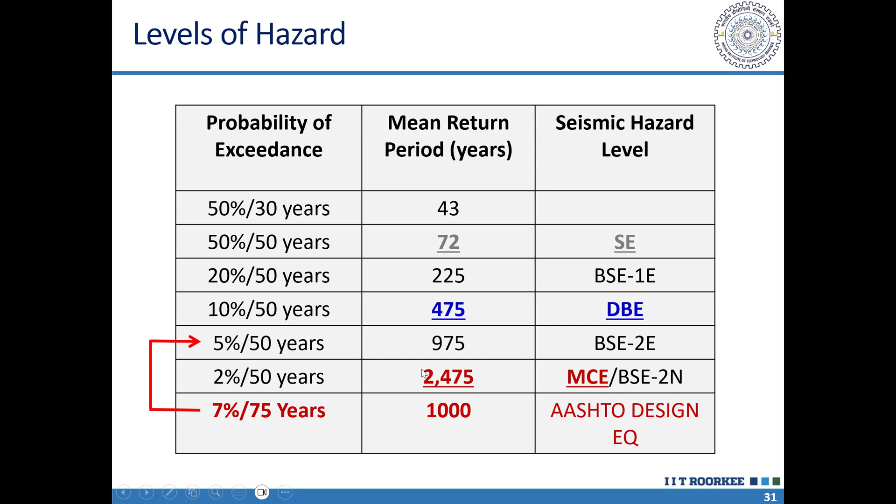So I will skip this. Now, in our current code, if I have to calculate the response spectrum corresponding to DBE or MCE, how can I obtain it? What is given in the code is a spectral shape, normalized by PGA. So it is wrong to say that this is SA by G. Actually it is SA by Z, because the response spectrum is divided by the Z value. That's why this becomes 1.

So it is SA by Z, a normalized spectral shape, and when we multiply it by 1.5Z, which is given in the code, because the Z given in our code corresponds to serviceability level earthquake - rather, Z by 2 corresponds to serviceability level earthquake. It is the median value obtained from deterministic seismic hazard assessment. In deterministic seismic hazard assessment, there is no concept of DBE or MCE, because that gives just one value - either mean value, or mean plus some factor times sigma. Mean plus 1 sigma is generally considered equivalent to MCE, which we obtain from probabilistic seismic hazard assessment. So for equivalence, we can multiply by 1.5Z, then it becomes equivalent to MCE. If I multiply it by 0.75Z, half of this, that corresponds to DBE. And if I multiply by Z by 2, or 0.5 times Z, that corresponds to serviceability level. So if you have to interpret the current code in terms of DBE, MCE, you can interpret it like this.

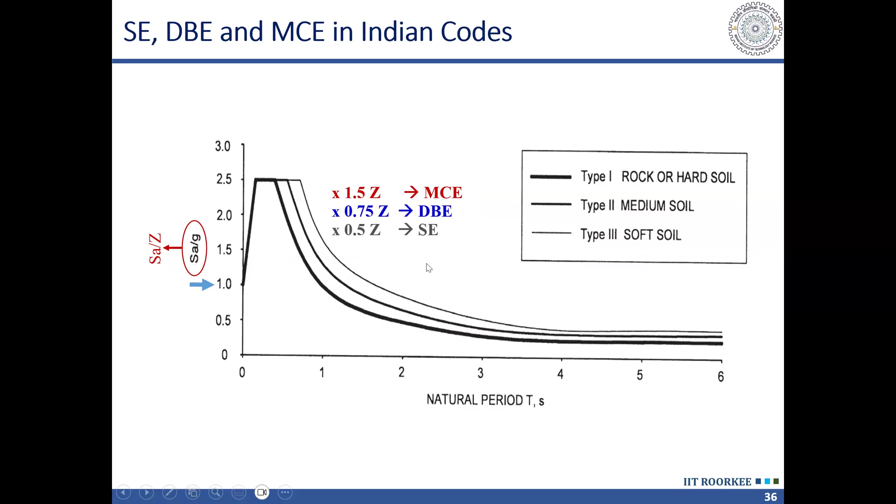But soon, within a few months, this is going to change. And this factor of 1.5 - you can ask where that 1.5 is coming from. If we compare our load combinations, this factor in our code is given as a load factor. Only our code currently gives a load factor greater than 1, whereas other codes, Eurocode as well as ASCE 7 - here I'm showing ASCE 7 - give a load factor of 1 for earthquake. EV is the vertical component of the earthquake, EH is the horizontal component, and load factor for both is 1.

Now, the revised code has hazard estimation of earthquake forces using probabilistic seismic hazard assessment, whereas the current code was based on deterministic seismic hazard assessment. The revised code, which is going to come soon - I hope within a few months that should be out - is based on probabilistic seismic hazard assessment, and the concept is that different structures will be designed for different return periods. So it is the same concept as we have used earlier in terms of importance factor.

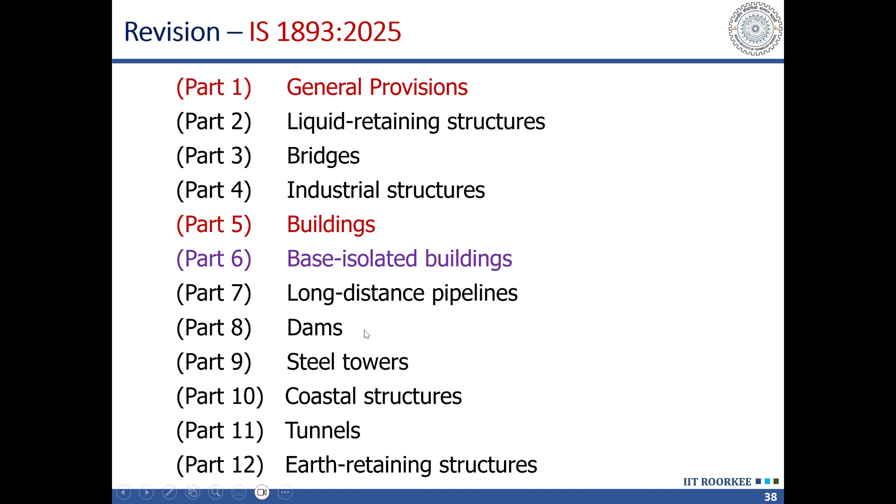The major changes the code has proposed are the 12 parts. Out of that, Part 1 is now dealing with general provisions. Earlier, Part 1 was general provisions and buildings, so buildings have been removed from that and taken to a separate part. Part 1 is general, giving the hazard applicable to all types of structures, since it just gives the hazard with respect to return period.

Then a revised earthquake zoning map - the zoning has been changed, I will show you just now. And the response spectrum, as I have shown, has been now provided up to 10 seconds. Earlier it was only up to 6 seconds, with 4 to 6 seconds taken constant. Now not only has the shape been changed, but it has been plotted up to 10 seconds, because some of our tall buildings were having periods close to it, and designers were having difficulty taking spectral acceleration values for those long periods since the response spectrum was not defined. Now the response spectrum is defined up to 10 seconds.

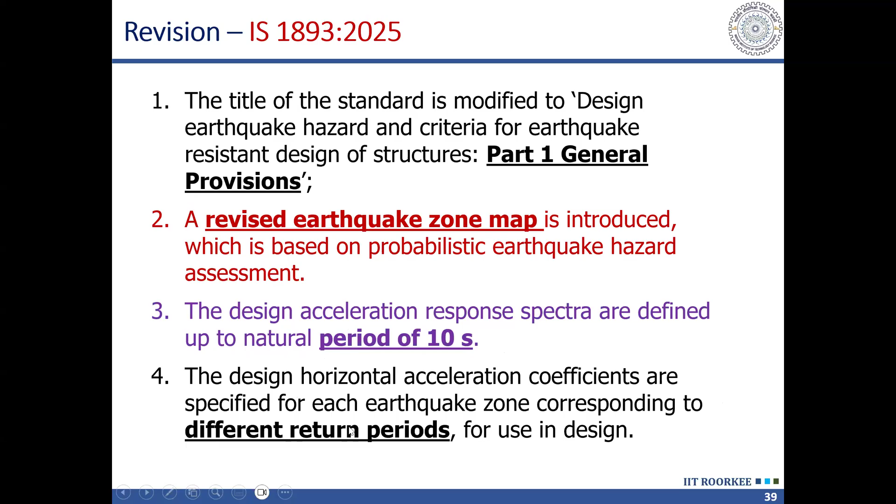Horizontal coefficients are provided for different return periods. The code also talks about how to select ground motions, so for time history analysis we need selection of ground motions. The code is talking about selection of ground motions also.

And to consider soil flexibility, a method is also given. Similarly, the liquefaction potential procedure given earlier has been slightly modified. And protection of architectural elements, non-structural components - earlier our code was not dealing with this. So IS 1893 Part 1 is also talking about calculation of forces in case of non-structural components.

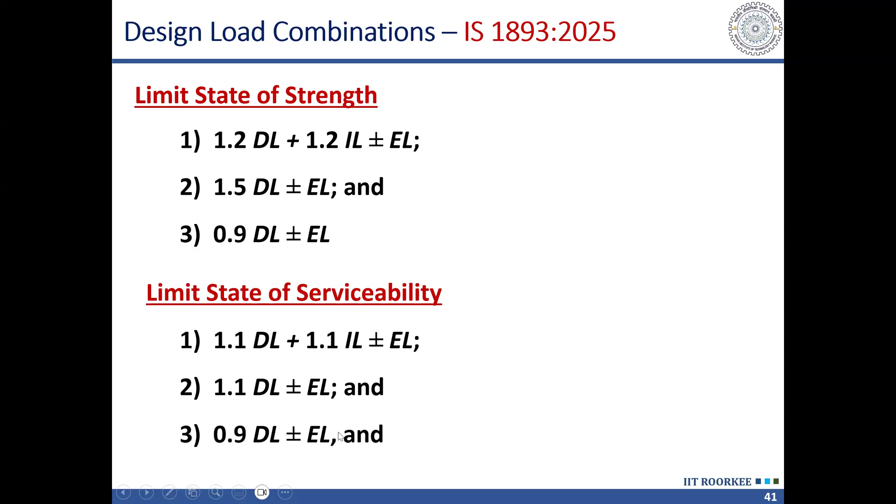Interestingly, the load combinations have been changed. Now these are very similar to what we saw in ASCE 7. The load factor is 1 for earthquake, whether it is limit state of serviceability or limit state of strength. Limit state of serviceability combinations are also to be used for the working stress method. So the load factor is 1, but the earthquake load calculated in the limit state method versus working stress or serviceability earthquake have different return periods, which I will show just now.

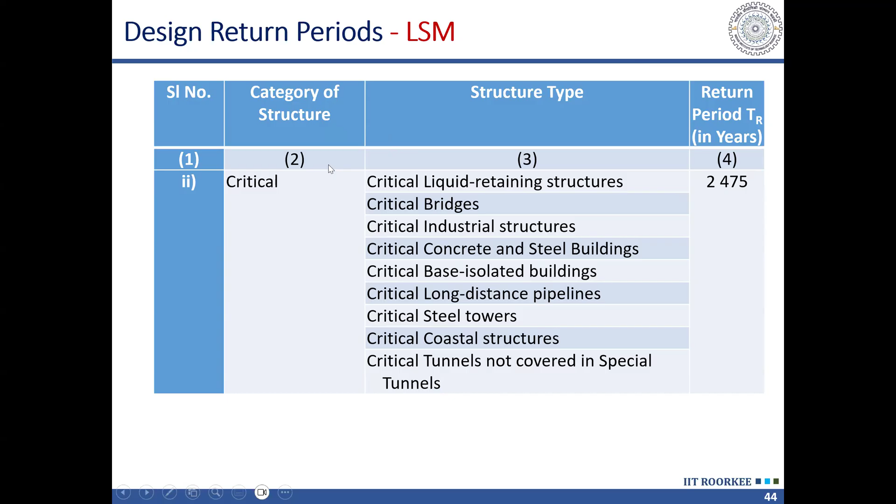The structures have been divided into different categories with corresponding return periods to be used in strength design. In case of limit state method or strength design, special structures - very important structures - will be designed for a different return period of 4975 years, roughly 1.5 times MCE. Earlier these were designed for DBE multiplied by an importance factor of 1.5, roughly equal to MCE; now they will be designed for 1.5 times that force. Critical structures will be designed for 2475 years - we can think of this as similar to our important structure category in the current design. Important structures will be designed for 975 years.

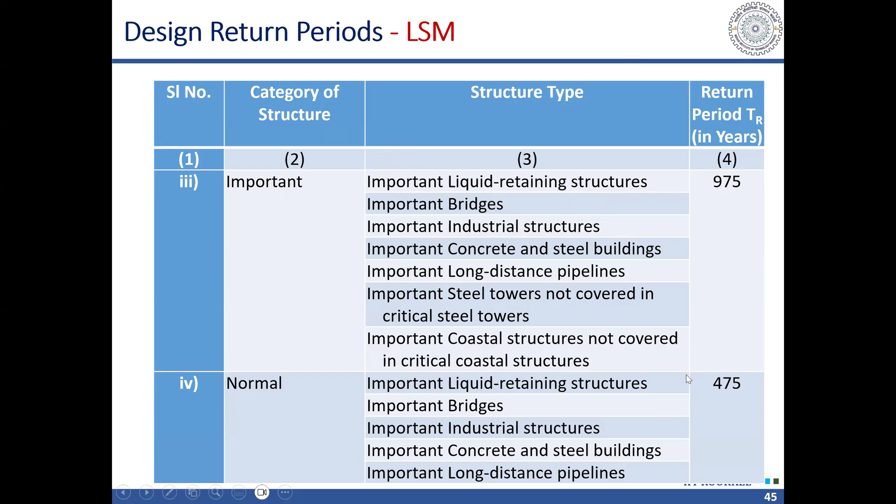We can think of something like an importance factor of 1.2, and normal structures, of course, 475 years DBE, importance factor equal to 1. Similarly, in case of working stress method, special structures were earlier designed for serviceability level earthquake, 75 years earthquake, with an importance factor of 1.5, so that becomes something like DBE 475. So those will be designed for 975. So a new class has been created here of special structures, and these will be designed for 1.5 times the forces for which we were designing our important structures earlier. Then these critical and important structures are similar to our 1.5 and 1.2 load factor structures, and normal structures, of course, as usual, will be designed for serviceability.

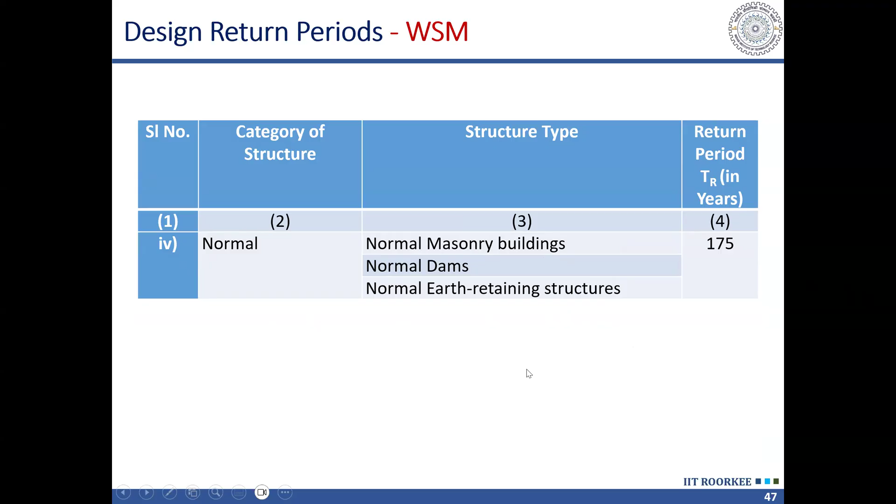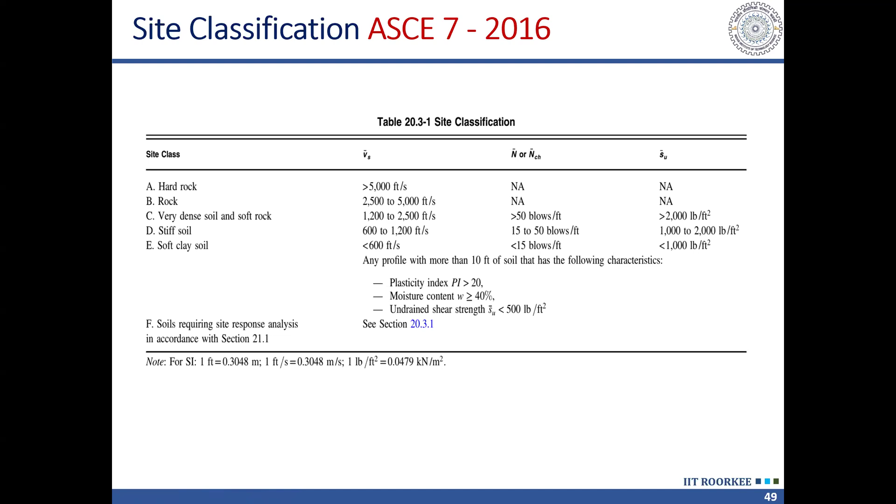Now, for site classification, there is a better classification now based on ASCE 7. So similar to ASCE 7, different classes are defined depending on shear wave velocity. In Eurocode also, there is a classification, with a slight difference between Eurocode and ASCE 7. So what is there in the American code has been adopted in our code. Site class A, B, C, D, E are based on shear wave velocity. If the shear wave velocity is greater than 1500 meters per second, then it is hard rock. So A is hard rock, B is medium or normal rock. The reference class is this B. So A and B, both are rock, and these have been put together in the code while defining the response spectrum; it is considered to be the same.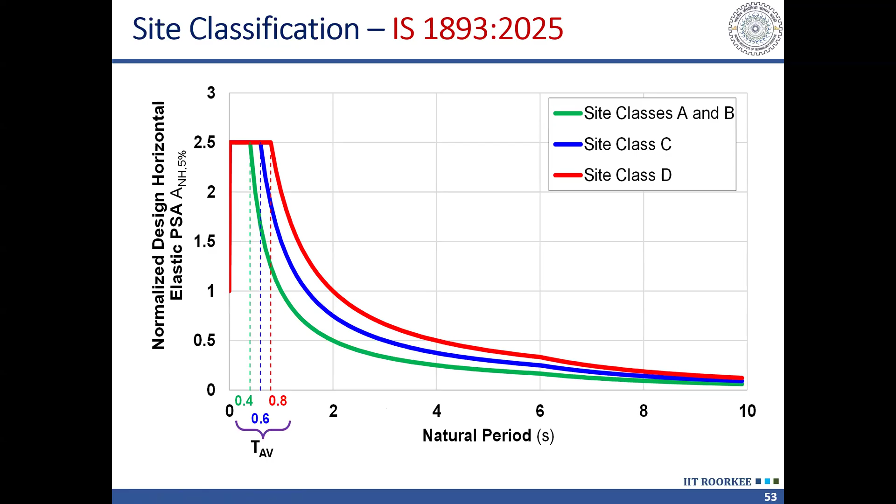Then C is medium soil, between 360 to 760 meters per second. D is soft soil, and E is very soft soil, where the shear wave velocity is less than 180. These response spectra are defined for A and B, same as I said just now. Then C is something like medium soil, and D is something like soft soil. For E class, which is very soft, the response spectrum is not defined in the code; we have to go for site specific analysis for that.

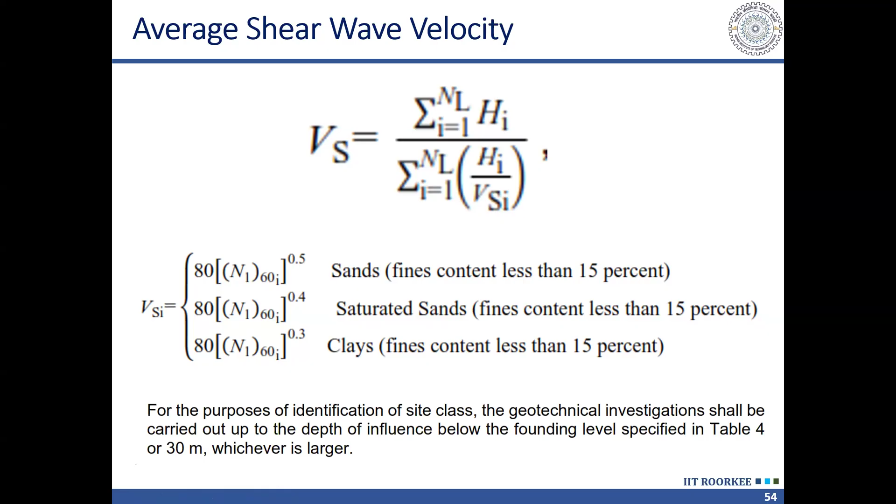And this depends upon the average shear wave velocity. So how to calculate average shear wave velocity, and how to get shear wave velocity from the N value, the SPT values, that is also now defined in the code. So if I have the shear wave velocity measured directly, or I have the N value, I can get the average shear wave velocity, and the classification can be done.

ASCE 7 provides two amplification factors for the response spectrum: one for the acceleration controlled range and one for the velocity control range. In the velocity control range, for site class D, this factor ranges from about 2.4 to 2. Currently our code uses a factor of 1.67, which is on the lower side, but our revised code has changed this to 2 for site class D, so in place of 1.67 we now have 2 by T.

In the displacement control range, the amplification factor is the same, 2, but this is not present in the acceleration control range. If we look at the ASCE 7 values, there is a factor FA in the acceleration control range too, where the response spectrum is amplified by 1.6 to 1.4 times. That factor is not there in our code. If we take 2, it is close, but still on the lower side. In low seismic zones with very soft soil, this factor can go up to 2.4, whereas our code gives 2, so it remains on the lower side.

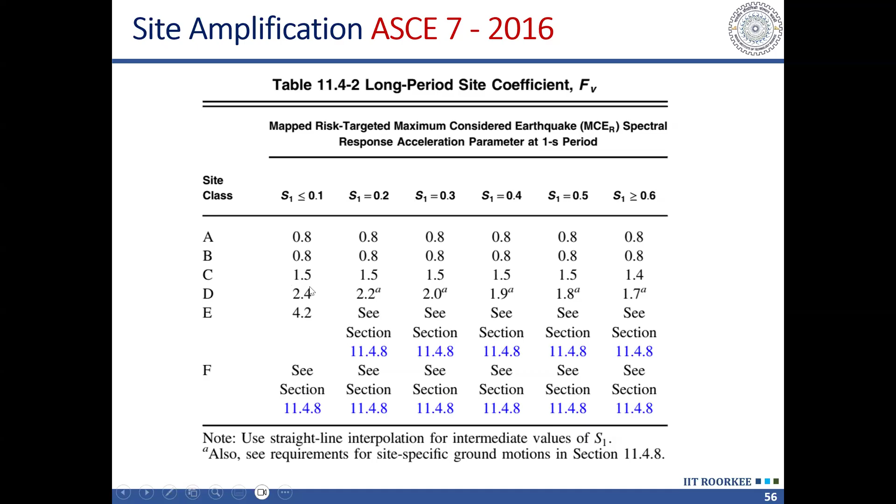The code also defines the value of spectral acceleration below the ground level. At 30 meters, it becomes 50% of what we have at the surface, and in between it reduces linearly. Then, vertical ground motion.

For vertical ground motion, the shape of the response spectrum, whatever we have in the horizontal direction, is to be multiplied by a factor delta V. This delta V is itself a function of period. In the period range between 0.01 to 0.1 second, it will be multiplied by a factor of 0.8, but beyond 0.1 second, it will be multiplied by 0.67, or 2 by 3, which we currently have as well.

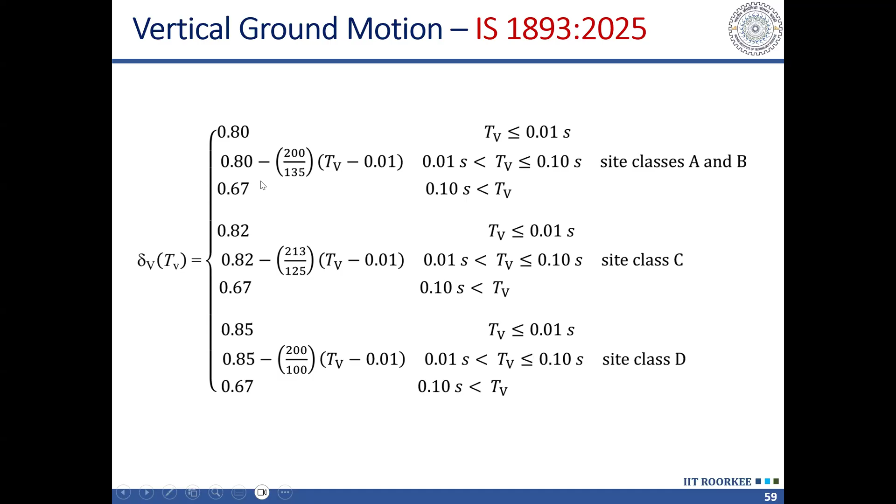Very few structures, or only higher modes of multi-degree freedom systems, will fall in the short period range. So we can see that in the short period range, the spectral amplification in the vertical direction is higher, while in the longer period range, beyond 0.1 second, it is 2/3. So in very short period range, less than 0.1 second, the vertical response spectrum is more than 2/3, it is 80% of what we have in the horizontal direction, whereas for periods greater than 0.1 second, it remains the same as currently, 0.67 times the horizontal response spectrum.

The code also provides modification factors for damping. For different structures, if we need to modify for damping, these factors are also given. Currently we design for 5% damping, and all our structures, or the reference response spectrum given in the code, correspond to 5% damping. For damping greater than 5%, a formula can be used, and between 0.5% and 5%, another formula applies. This damping formula, which varies across different damping ranges, is also provided in the revised code.

Now coming to the calculation of seismic forces and displacement, the expression remains the same. The only difference is that the factor of 2 we had earlier is missing. Now, instead of Z by 2, we are using Z directly. Earlier, when using Z by 2 multiplied by 1.5, we were actually calculating forces for DBE, the design basis earthquake. But now we have to take the value of Z for the corresponding period. For normal structures, Z corresponds to DBE; for important or critical structures, this value is going to be more than DBE.

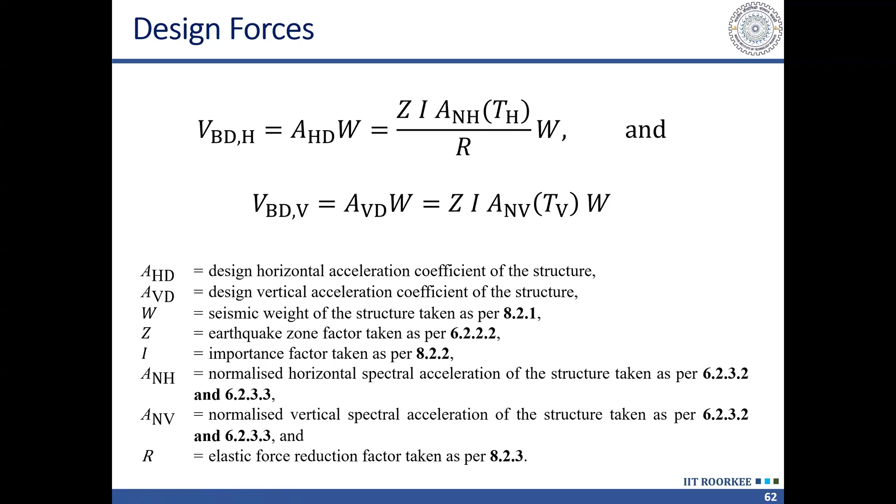Minimum design force, although I saw it in one earlier version which was put in wide circulation, but in the last revision which I have seen, I could not find this. Maybe this will come in the final draft of part 5, since IS 1893 part 5 will be related to buildings, so when that part is finalized, I expect it to be there.

A minimum force will be specified, because we have seen that in long period structures, especially, the value of Sa/g goes on reducing. So even if the period of the structure is very long, we have to design for a minimum earthquake force, and that minimum force will be specified.

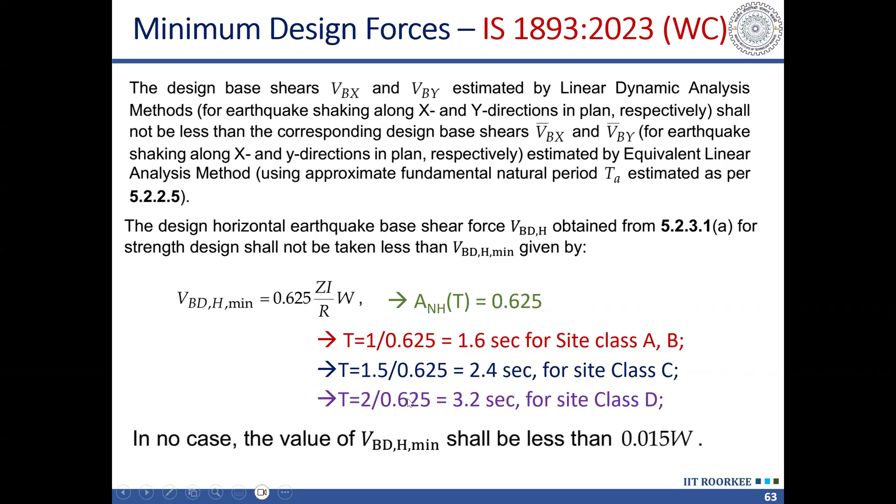In IS 16700 for tall buildings, that minimum force, the minimum seismic coefficient, is already defined, specifying what percentage of the weight we have to consider.

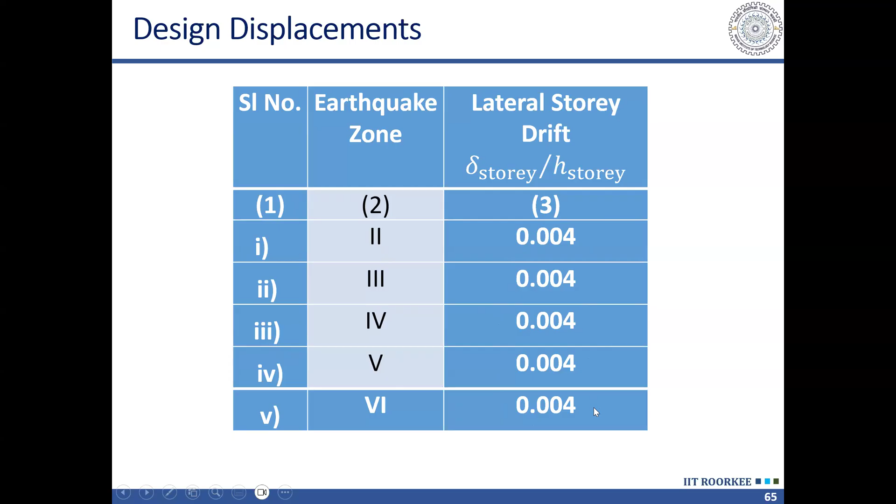Then design displacements. In one of the revisions, you might have seen that the lateral drift permitted by the code was depending on the zone, so in zone 6 it was something like 0.002. Now that has been changed. This interstory drift is constant, same as in our current code, 0.4% interstory drift in all zones as the maximum. This is going to govern the stiffness or the size of our shear walls and members in case of tall buildings.

Then the last part I discussed is that the revised code is also providing design criteria for non-structural components. It is well known now that similar to the amplification we have seen in the soil, the ground motion gets amplified within the building also.

So if I measure the floor acceleration near the top of the building and compare it with the base, then near the top I will get roughly 2 to 3 times of what I am getting at the base. That will also depend upon the intensity of the shaking.

When we have higher intensity like MCE, the structure will get damaged and dissipate energy, so that amplification will reduce. But in case of lower intensity, more frequent earthquakes, let's say serviceability level earthquakes, the structure will remain elastic, and when it is elastic the amplification is more, sometimes more than 2.

But because we are designing for a higher return period, this factor is considered to be 2, given as 1 plus x/h, where x is the level at which we are considering our non-structural component, and h is the total height of the building. So at the top, x becomes equal to h, and this factor becomes 2.

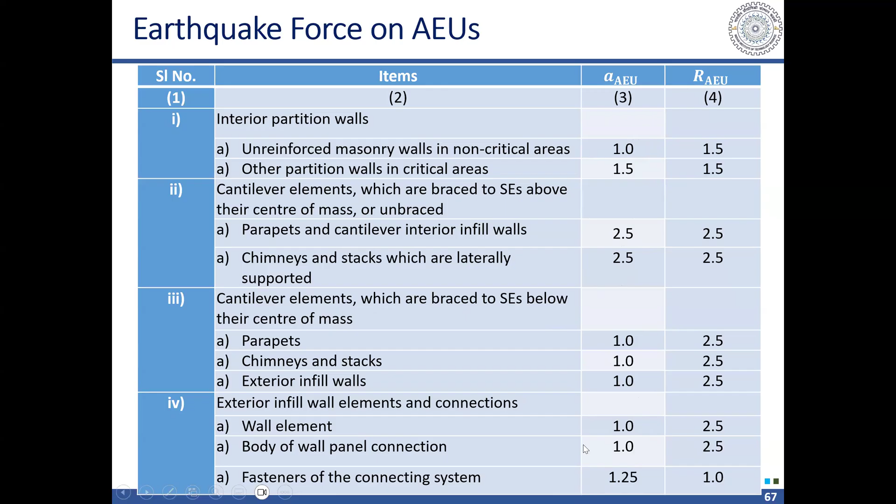This represents the period of that component which we are considering, the non-structural component. The response reduction factor again has a peak value of 2.5. So in some cases, both the response reduction factor and this amplification factor will cancel out each other. And in some types of non-structural components where large deformability is present, this response reduction factor can go even up to 3.5.

So the last thing which the code is talking about, I will take 5 more minutes and finish this, is time history analysis. The code talks about time history analysis and how to select it, and also provides in which zone for which type of structures the time history or response history analysis may be required.

So in those structures where we are not able to excite 90% mass, irregular structures or very tall buildings, or buildings with basement, it may be possible that we are not able to excite 90% mass. Those structures need to be designed using time history analysis. Rest of the structures, response spectrum method using mode superposition is as good as the time history method, and that is acceptable as a dynamic analysis if mass participation we are able to get up to 90%.

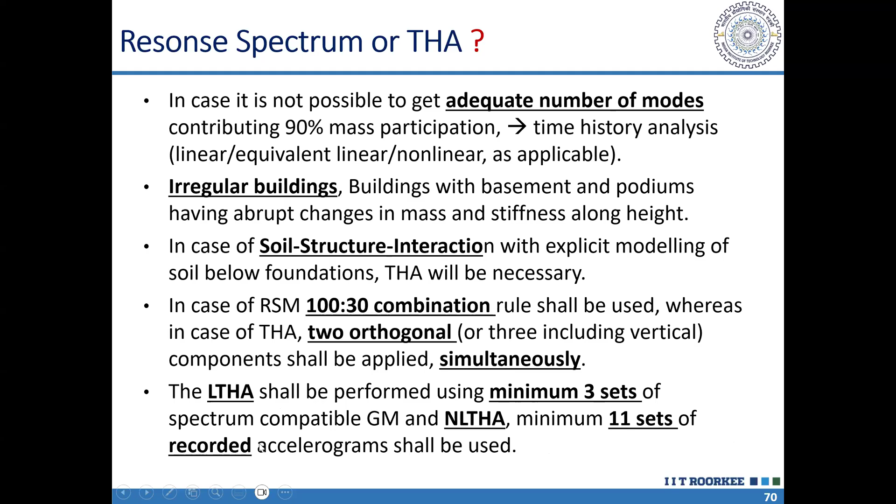So in case of time history analysis, if we are performing linear time history analysis, minimum 3 sets, and if we are using non-linear time history analysis, minimum 11 sets of recorded ground motions are required. These time histories have to represent the design response spectrum.

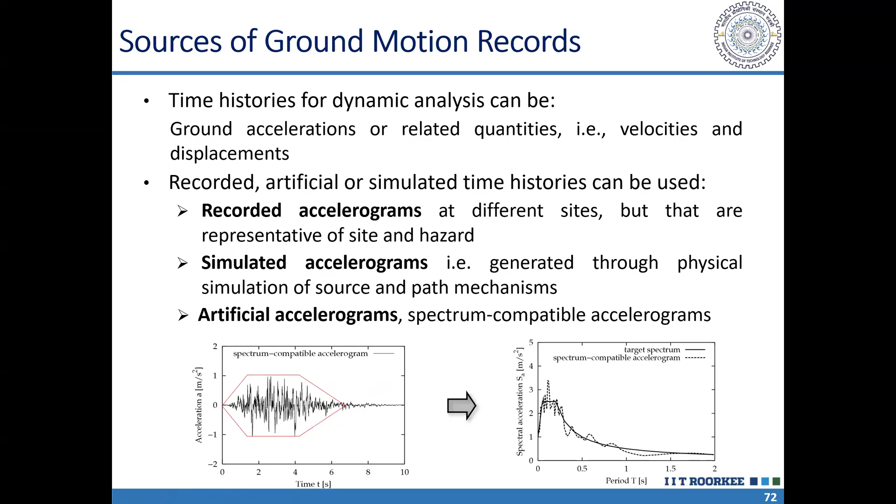So there are two sources of these. Either we can take recorded time histories and modify them in such a way that they represent our target response spectrum, or we can simulate or generate artificial accelerograms. Artificial accelerograms are not preferable because they distort the natural characteristics of the ground motion. Recorded accelerograms, recorded time histories of ground motions, those are desirable.

Now, two types of scaling are possible. One is amplitude scaling, where we multiply the whole time history by a constant factor. So what should be that factor? One way is that we scale it in such a way that the PGA is matching.

What we do is take the period of interest and scale it at this period of interest, so that at this period it matches my target response spectrum. But again, I can match at one period only. At other periods it may be different - it may be close to my target response spectrum or it may be very different. So we have to consider a number of such time histories, scaled at the period of interest, in such a way that the mean or median of those time histories is very close to the target response spectrum.

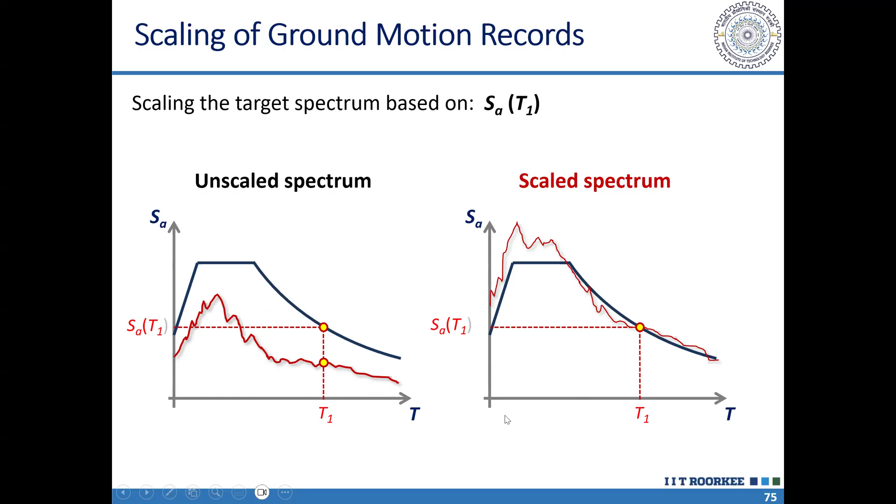So this is acceptable, but it is on the conservative side in case of linear time history. In non-linear time history analysis, this is not allowed, and we have to use selected, recorded ground motions, scaled either with respect to the spectral acceleration, considering a minimum of 11 time histories, so that the median of those 11 time histories is close to this response spectrum. There are some sites where we can download our ground motions, what we call a strong motion database.

Some of these have been quoted in our revised or under-revision code, and you will find that reference. Then there are some software which help you in processing those time histories. For example, Seismomatch. You can use Seismomatch to

make the time history compatible with your target spectrum. So in the frequency domain it will change, and it uses a wavelet transformation method. The wavelet transformation method tries to preserve, to the extent possible, the natural characteristics. As compared to an artificial earthquake, this is much better, but still it is not a natural earthquake.

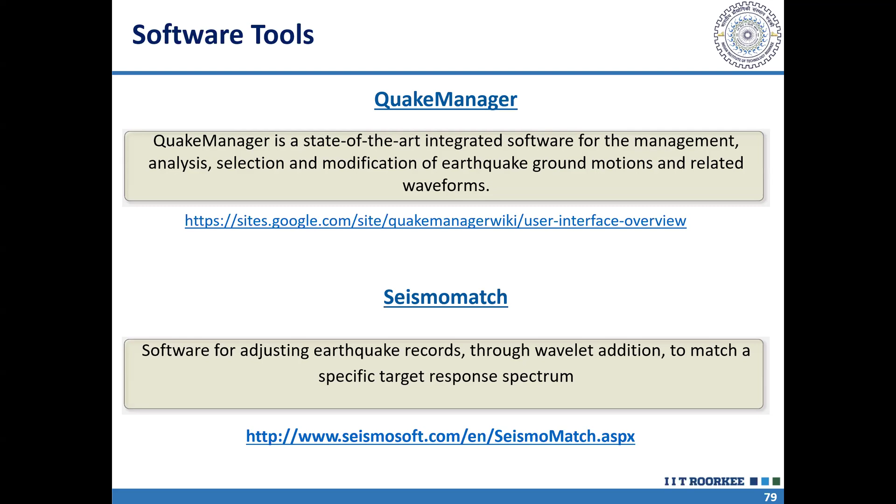Thank you, that's what I wanted to discuss. I will now unshare and we can take up the question.

Thank you, Dr. Yogendra Singh sir, as usual you have given a wonderful view of the new code. We have already done it in the past. This was very important from the practical engineers' point of view because there are going to be a lot of changes, especially in time history, and participants will be eager to know when it will be out. Any idea?

There was a meeting day before yesterday, and in that meeting the chairman informed that there will be no more changes, because the revision was also getting changed repeatedly. A lot of input was coming from different sources, and they were changing it. So in response to some discussion on dams, he informed that there will be no more changes. It will go to printing now.